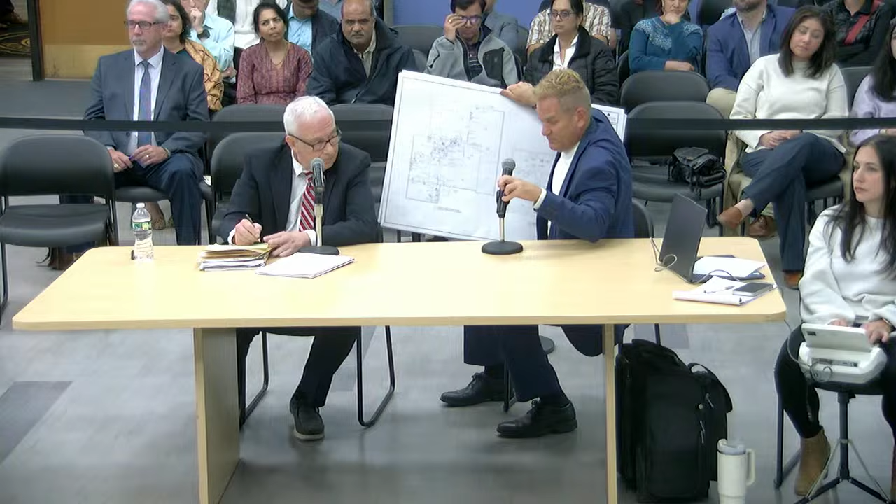Essentially, the current configuration of the house had a void in the back left corner. Mr. Kazmarski, if you'd like to take the microphone and come up to bring it forward so the board can actually see it.

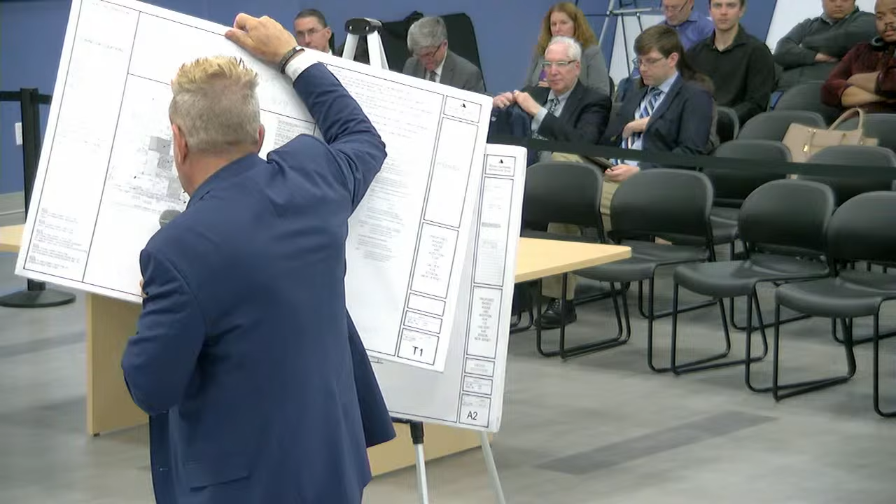So for the basement, what is the total square footage going to be when it's done? So the area that's going from crawl to basement is 22.5 wide, and I don't have the measurement on here, I would say approximately 25. So approximately 22 by 25 area that will go from crawl to basement.

Any other questions for Mr. Kozmarski? Seeing none. Thank you very much, appreciate it, Ms. Shar. Thank you. Call Mr. DuPont. We'll leave this up, I'll leave the site plan for you.

Please raise your right hand. Do you swear or affirm the testimony you'll give this evening is the whole truth? I do. Okay, please state your full name and spell it for the record. John P. DuPont, D-U-P-O-N-T. Mr. DuPont, you appeared before the board prior. If you could please give us a summary of your background qualifications.

Certainly. So I am a licensed professional engineer and planner. Before you today as a professional planner, licensed in the state of New Jersey. I've acted as the Planning and Zoning Board engineer and planner for the borough of Carteret for the past 28 years. I've been throughout the state on applications, including this board, both as a planner and as an engineer. Your licenses are current and in good standing? They are. We'll accept you. Thank you.

Mr. DuPont, you've been retained by the applicant to give the planning testimony regarding this application and variance, correct? That is correct. Did you have an opportunity to check out the property? I certainly have. Could you please give the board the results of your observations? Absolutely. So we're talking about 110 Calvert Street, block 979, lot 5.02 in the RB zone. As you heard, it's an existing single-family, one-story dwelling, approximately 2,300 square feet, a ranch on the property. The applicant is proposing to construct an 800 square foot addition to the rear of the property, basically to square off the home as the architect just showed you.

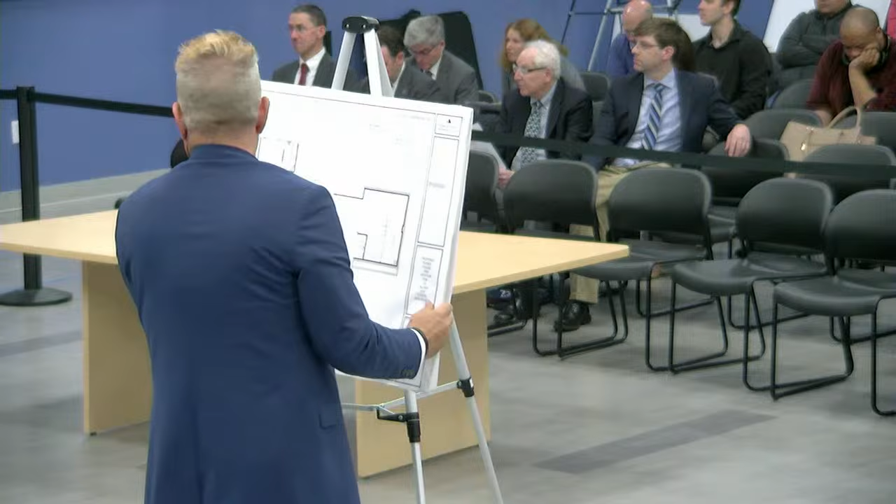Chair, just as the board's considering this, I haven't been involved in the conversation, but there's two things the board may want to consider: Edison's definition of floor area ratio, which is specific to Edison, and Edison's ordinance is pretty tight - it generally excludes unfinished basements and attics from the floor area ratio calculation. But the exclusion doesn't really mention habitable spaces, it doesn't make that classification. Habitable spaces, as defined by the Uniform Construction Code, are areas intended for daily living activities - bedrooms, living rooms, kitchens, and dining rooms. Other things like bathrooms, toilets, closets, halls, storage are not included as habitable for UCC. So, Mr. Architect, you're going to describe to the board the difference between UCC and what the ordinance intentions were versus the language of the ordinance.

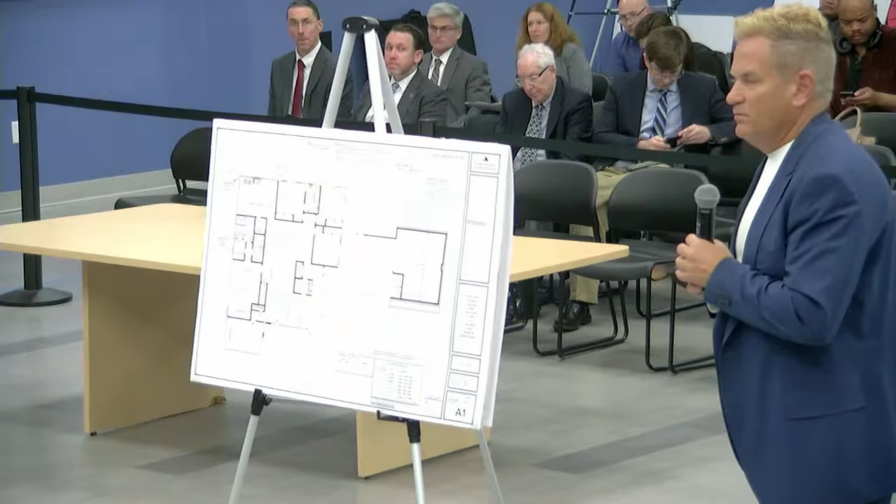Mr. Scheer is going to determine on the fly whether he needs relief from the floor area ratio ordinance, because right now I'm hearing that you don't need relief from the floor area ratio ordinance. Yeah, we do not need relief from that. Okay, so just to make the distinction, you did prepare the floor area ratio calculation certification sheet and submitted it to the board, right? Yes. And everyone found everything to be in order? Yeah, we're significantly under the allowable floor area ratio. And that's because there's no second floor.

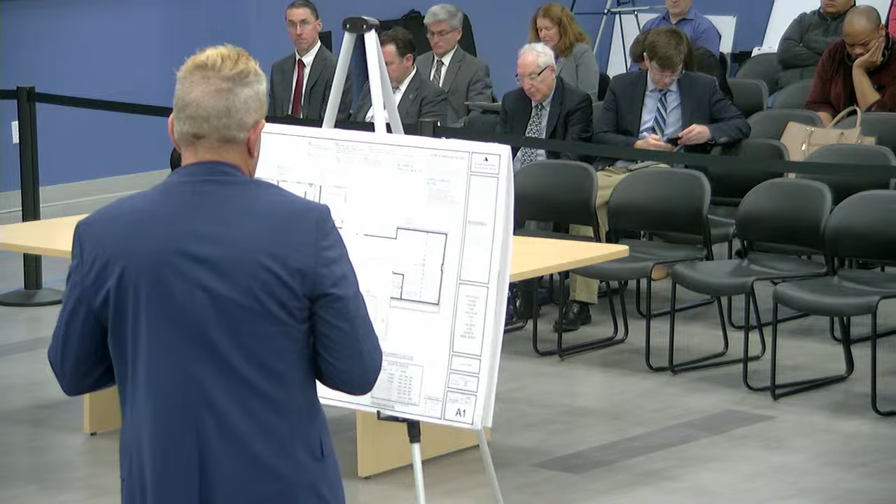Are you counting, whatever the application is now, the basement square feet in the floor area ratio or not? I would have to look at the worksheet. It's not included there. No. Uninhabitable attics and basements are not included in that. Correct, up to 2/3 of that. No, just don't go there - just habitable attics.

Sure, so we have 2,800 square feet. Let's see, we are... right, so where 44% is allowable, we're at 27%.

No, I get it, but does that 27% include the basement square feet or not? So I guess in Edison, garages count? Garages count, habitable attics count, but not uninhabitable attics and not basements. And what about basements with finished rooms?

Right, so I didn't include that in the calculation. You're making it a habitable basement. Even if it's a finished basement, it wouldn't count. Correct.

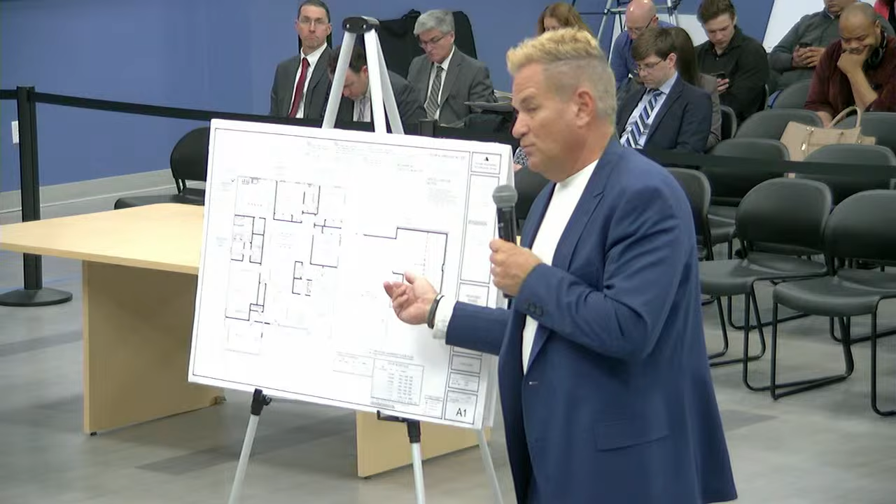The bathroom's been modified to improve its area - it's actually slightly bigger than the existing square footage. This is the area here that has been added as additional basement space. This also would not be included in the floor area ratio, and there would be no bedrooms in the lower level, so it would not trigger anything.

Basements are not included, Ron. Yeah, it's just not, so - finished or unfinished? That 27% is accurate on the plan. Habitable attics are included, uninhabitable are not. Thanks, Jim.

Right, so how much work has been done now for the basement? Did you do the foundation, or just the excavation? Excavation only? The full basement is excavated now, but no foundation? I don't know if it's totally excavated.

He stopped. I don't believe excavation is completed - it's not completed. I did ask, and I spoke to John Soltis. The contractor did take my plans, submit them, obviously anticipating a permit, and started the work.

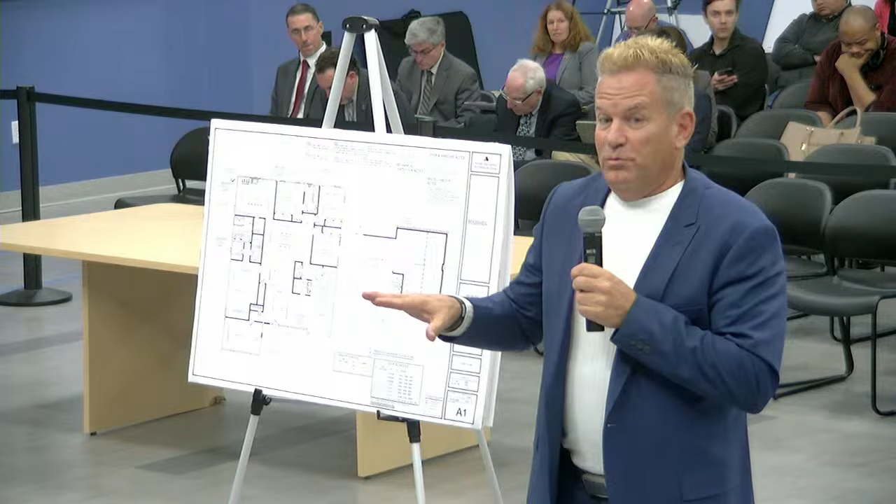So I guess it's worse to start the work with no permit and no submission, but he submitted it and started the work before the release.

But there's a letter of denial on those plans - is that correct? Is that the same plans we're talking about? So he got denied, but then he still submitted it? Well, no - he submitted, started work, then got denied.

So he got denied? No, sir. The timeline's messed up - he received a clear denial to start or do the work. And he started after that? Correct, yeah, he started after that. Oh, I didn't know that.

We've had no contact with the contractor, no contact with the homeowner, none. No one came to our office to explain. I put my phone number down - contact us please, so we can rectify the situation. Never received anything. But I take Mr. Shire's word that they pleaded not guilty to the court, but I received nothing. So that's what it is.

Right, we have two things happening in tandem - I know, a violation for that, and then the request. I got you.

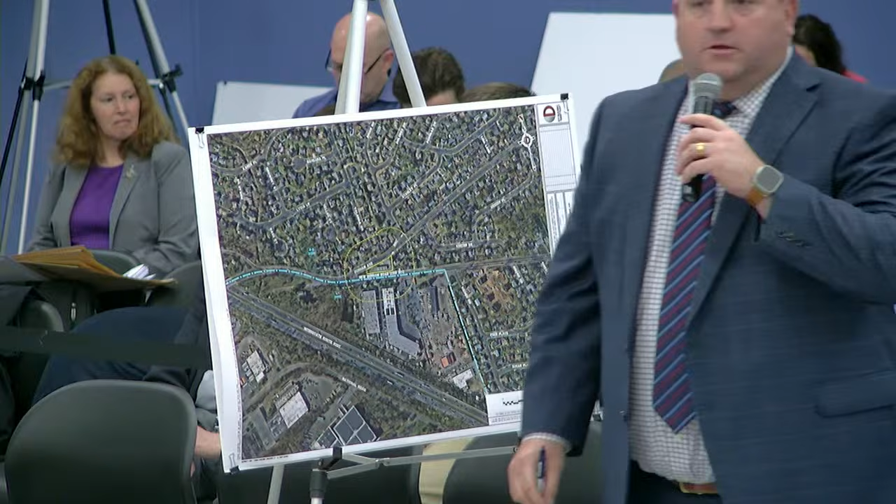We'll get there. Just the aerial. Yeah, so we'll start off with marking the aerial map exhibit, dated April 28, 2026. Has that been previously submitted? No, this is new. Okay, so mark it A1 then. A1. Thank you. And this is prepared by Dynamic Engineering. I'm sorry, what's the date on that? April 28th, 2026. Okay, so today. Yes. Okay, and you prepared that document? Yes. Okay.

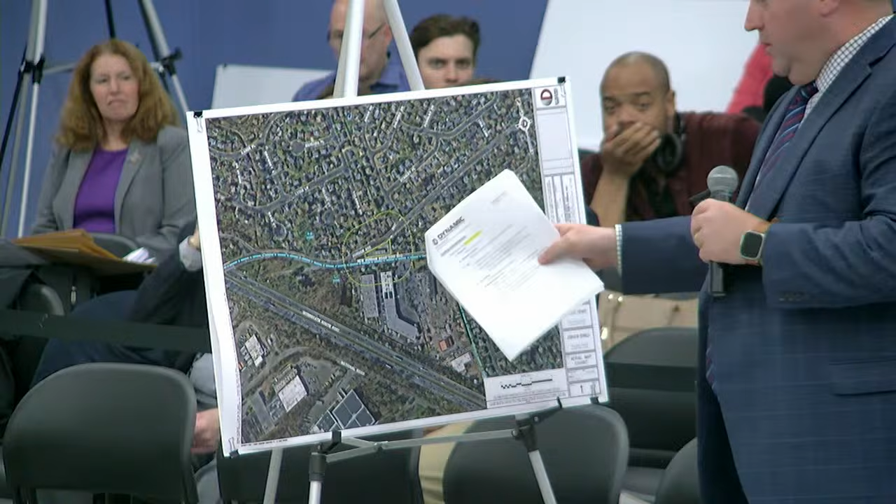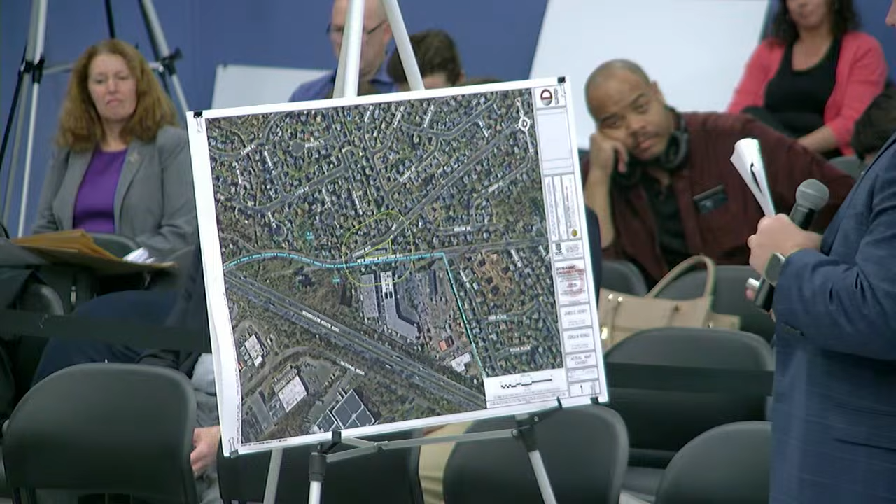So this document indicates an aerial image of the proposed property with the PIQ indicated in yellow in the center, and then a 200 foot dashed line around the property. There's also a blue line which indicates the separation between the LI zone and the RB zone, with the LI zone being south of New Durham Road and north of New Durham Road being the RB zone.

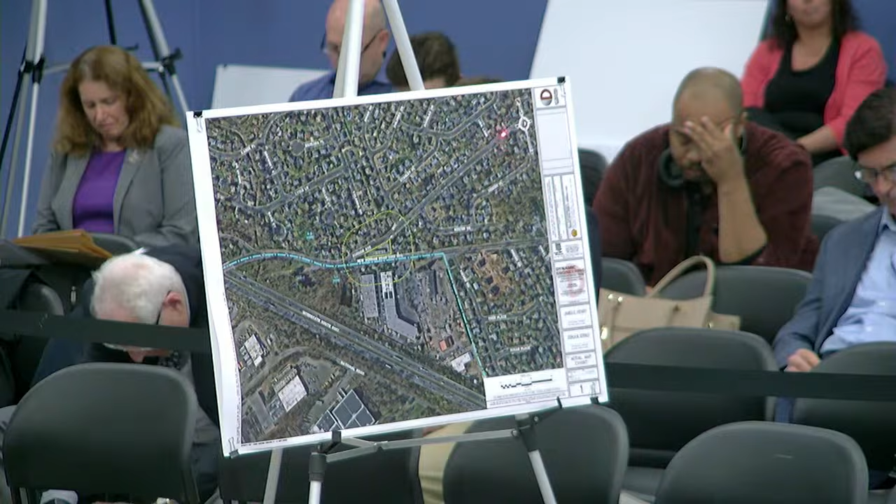The property is known as Block 5702, Lot 12, and the general location is 764 New Durham Road, which is County Route 501, and that traverses east-west. New Durham Road comes in at almost a 45-degree angle, headed northeast to southwest. The lot itself is kind of a pie shape, a very uniquely shaped lot. It's conforming as far as size, but very unique.

It has 2 frontages, 2 side yards, and frontage on Durham and New Durham Road, so it's very uniquely shaped, with its principal frontage being New Durham Road. From existing zoning, it's in the RB zone, as I mentioned earlier, which is a residential district.

Adjacent to the property, to the north are residential uses. To the east are also residential uses. To the south are industrial office uses. And to the west are residential, at the intersection of New Durham and Durham Road.

As far as existing conditions, as was mentioned earlier, we reviewed historical aerial documentation. The gas station was constructed between 1957 and 1963 based on historical aerials, actually before a lot of these residential uses were constructed. The property size is 0.67 acres. It's an existing gas station use with a small building along the easterly property line.

That building has a bathroom and storage area for the gas station. There are 4 pumps. The gas canopy is situated from east to west, where it has 4 pumps. It's been that way for a long time. There's a small trash area adjacent to the building to the north, approximately 10 by 10. It's very small under existing conditions.

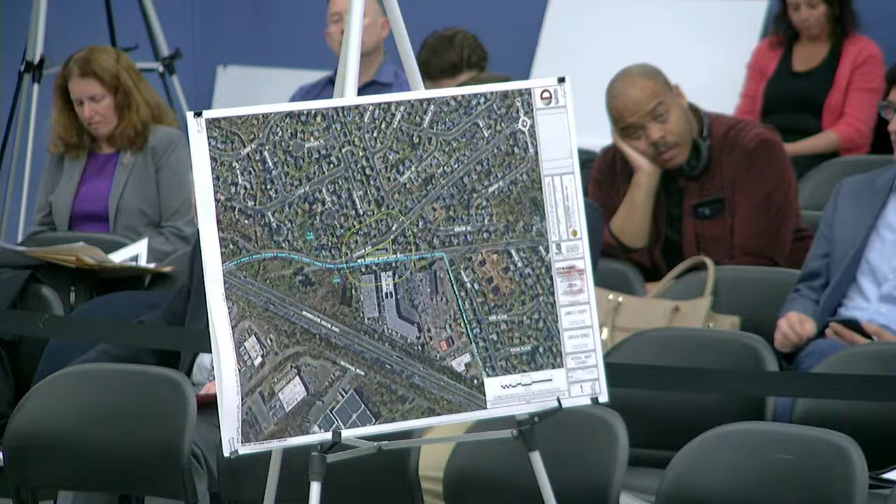That's an existing condition. There's no restrictions on delivery time. Is that tank underground? That's an underground tank. Okay, thank you. So there's underground gas tanks along Durham Avenue, with no restrictions on delivery time or anything like that, as the site was originally approved prior to municipal land use law.

So going into proposed conditions, I'll mark A2. And Jim, also, there's no stormwater management, there's no comprehensive landscaping on the property. It's been around since the 1960s, pretty much.

That's correct. Without change? Without any changes? Is that what your testimony is? There's been some upgrade changes, but not substantial modifications, as Mr. Javelle pointed out. There's definitely been a canopy added since the 60s, and modifications to the gas station. Back in the 60s there was no canopy, just a pump. So there have been changes throughout, but as far as we're aware, I don't believe there were any approvals from municipal land use.

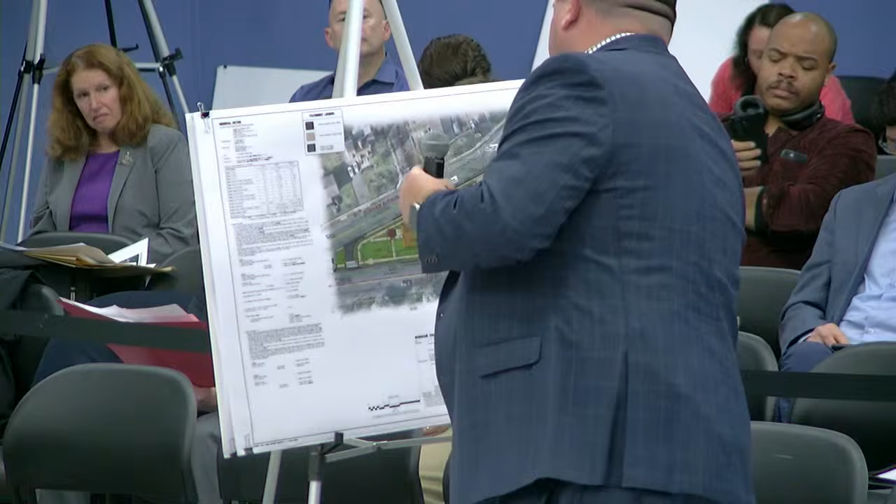All right, so Jim, we're up to A2. A2 is a rendering of the site plan that was submitted with a few minor changes based on professionals' comments. That will be the on-site improvement exhibit rendering, dated April 28, 2026. And who prepared that document? Dynamic Engineering and myself.

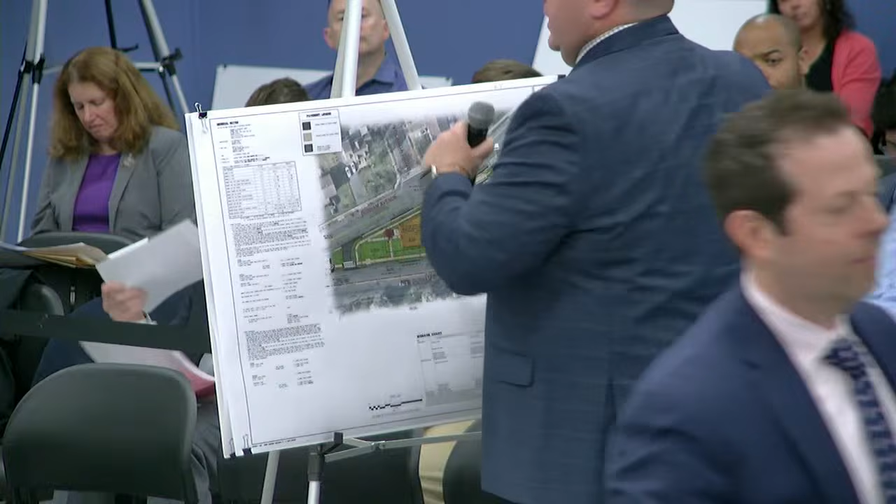Okay, thank you. So this is just a color rendering with the landscaping overlaid over the property and over the site plan. Under existing conditions, as I mentioned, the canopy was situated east to west.

The big thing, based on feedback we received historically, was that there was a previous application submitted that was not approved by this board. We wanted to pull everything away from the residential uses. When we met with the town's professionals, they indicated there was an issue at Durham Road and New Durham Road, and we'll get into the intersection improvements. But we wanted to situate this so all the activity was pulled more towards the tip of the triangle, away from the adjacent residential use to the east.

So what we're looking to do is propose a 2,820 square foot convenience store. As I mentioned, the hours of operation would be 5 a.m. to 10 p.m., so it wouldn't be 24 hours.

There will be one gasoline fueling canopy, square in nature, in the center of the site with a fueling kiosk. There will be two state-of-the-art double wall fiberglass underground tanks installed. The tanks out there today have been there, I believe, since the 1980s, based on the operations person I spoke to. So this would be a major upgrade from a safety standpoint as far as upgrading the existing tanks. From an impervious coverage standpoint, we would be reducing the overall impervious coverage by approximately...

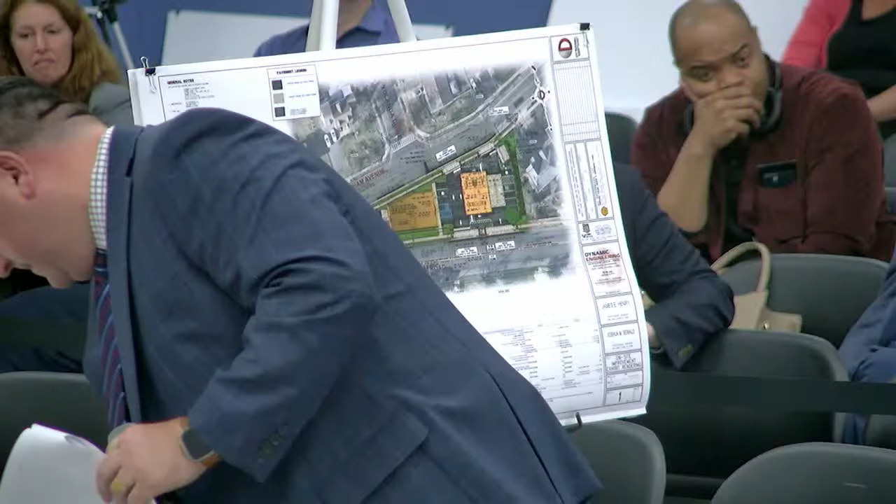As far as public improvements, I'm going to bring up an exhibit showing the existing conditions. We'll mark this A3 - it's the existing intersection conditions exhibit dated April 27th, 2026, prepared by Dynamic Engineering.

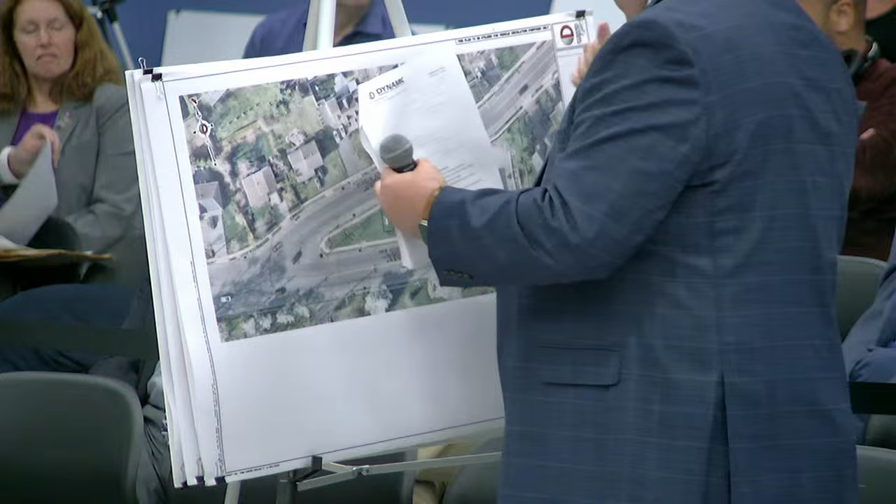This exhibit shows how a car aligns and what concerned the board professionals. As you come down New Durham Road to the intersection, the car is angled at about 45 degrees. One of the board professionals asked what improvements could align the car better with New Durham Road and provide a safer intersection. So our traffic engineer will get into more detail, but we show a number of striping improvements and landscape island improvements based on a meeting we had with the county.

We've had several meetings with the county over the last 6 months going over these intersection improvements. One other major public improvement: we met with the township's sewer department this week regarding the existing sewer that traverses east to west along New Durham Road. One of those pipes is back-pitched, so it's not flowing properly, and they asked us to upgrade the existing sewer main along New Durham Road. We agreed to do that - our client agreed to modify it so it's no longer back-pitched.

So those are the two main improvements we're doing. I'll show you an exhibit of the intersection improvements briefly, but I'll leave the main description of the intersection to our traffic engineer - I want to show it as part of the site plan application so it's clear.

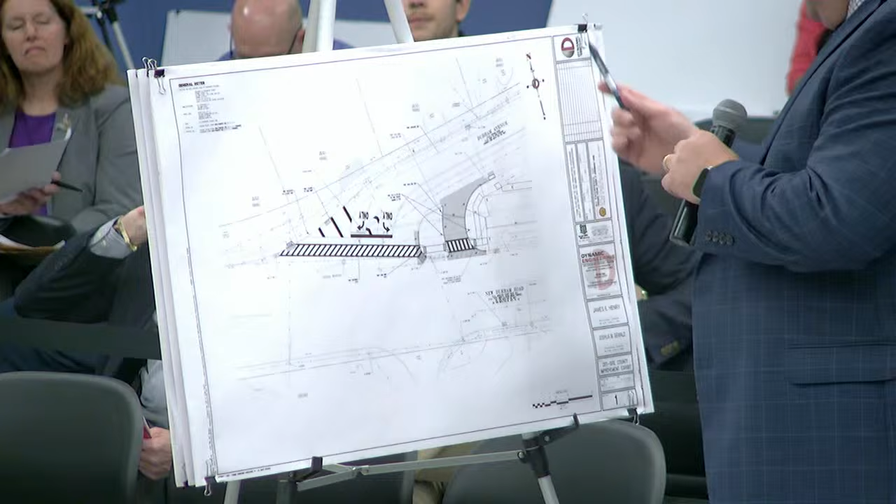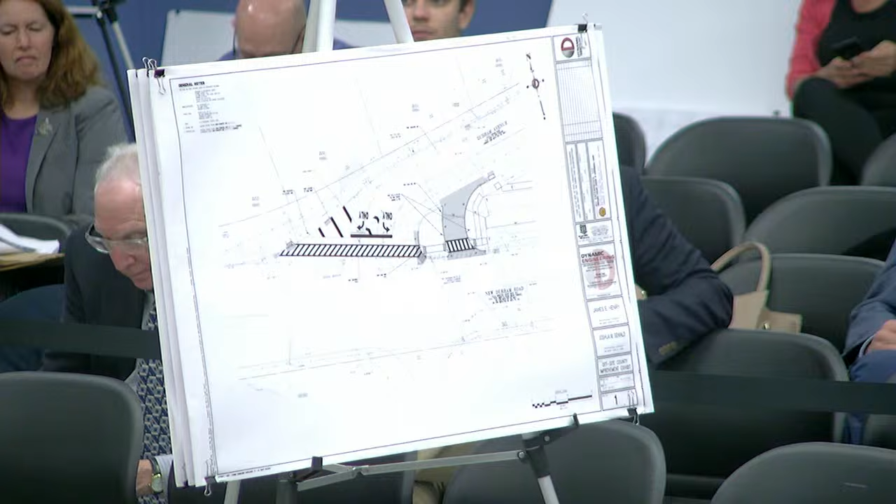This is the off-site county improvement exhibit, labeled A4, dated April 27th, 2026. It covers the modifications we're proposing, including adding a landscape island, a dedicated right-hand turn lane off New Durham Road, and re-angling the way cars hit the intersection so they hit it more at a 90-degree angle. We're also providing a crosswalk, and the island will act as a safe harbor for pedestrians. There's another crosswalk as well as sidewalk improvements along New Durham Road and Durham Avenue. Our traffic engineer will go into more detail on safety, but I wanted Jim to explain the site improvements themselves.

So I'm going back to A2, which is the site improvement exhibit - the colored version of the site plan. Correct.

From an operations perspective, I confirmed verbally with our client's operations person, who also worked at Shell prior to our client purchasing the property, that this gas station operated 24 hours and stopped operating that way approximately around COVID. So we're limiting the proposed hours to 5 a.m. to 10 p.m., as previously mentioned.

As far as number of employees, under existing conditions there's 1 employee at the gas station, and we're anticipating this neighborhood convenience store to have approximately 2 employees inside the building.

From a safety perspective, there was a comment regarding video cameras from the board's professionals, and I confirmed with our client that they're willing to provide access to the police if requested by the Township Police Department from a safety perspective, and add cameras.

As far as trash pickup, we're adding a 10 by 20 trash enclosure approximately where the existing trash enclosure exists today. It's decorative in nature and will be masonry to house the dumpsters under the proposed conditions.

As far as pickup, we will restrict the pickup time with the understanding that we're adjacent to residential to the north, and we want to make sure we're good neighbors. So we're limiting the hours, modifying the pickup time for the trash enclosure, and modifying the drop-off time for the gas, agreeing as best we can to make sure that happens during daytime hours so it doesn't happen overnight under the proposed conditions.

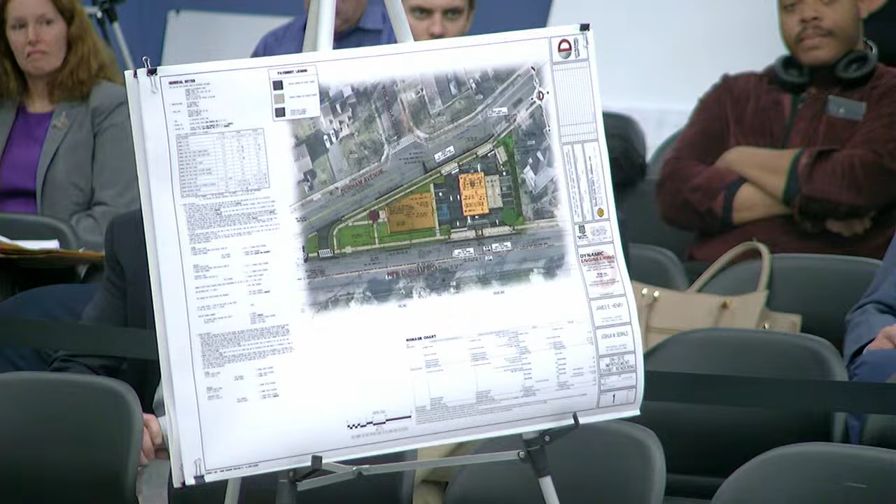There was also a comment from the board's professionals regarding a generator on site. There is no generator proposed on site. What our client generally does is contract with a generator company, so they come and drop off a generator within 24 hours if one is needed. It's not going to turn on once a week and create a noise issue - there will be a quick hookup inside the convenience store and the gas area, so if there's an emergency like Sandy, there's an easy way to get the gas station up and running.

And where would the generator, if it has to be deployed, be placed on the property? Likely just on the sidewalk area adjacent to the building.

All right, Jim, you want to talk about the lighting? Well, hold on a second, I think the vice chair wants to. Could you be more specific as to where the generator is going to be located?

So this is a portable generator. No, I understand where it is, but where would it physically be? It would either be in the front of the building or behind the building on the sidewalk areas. In front of the 5 parking spaces, or behind the building.

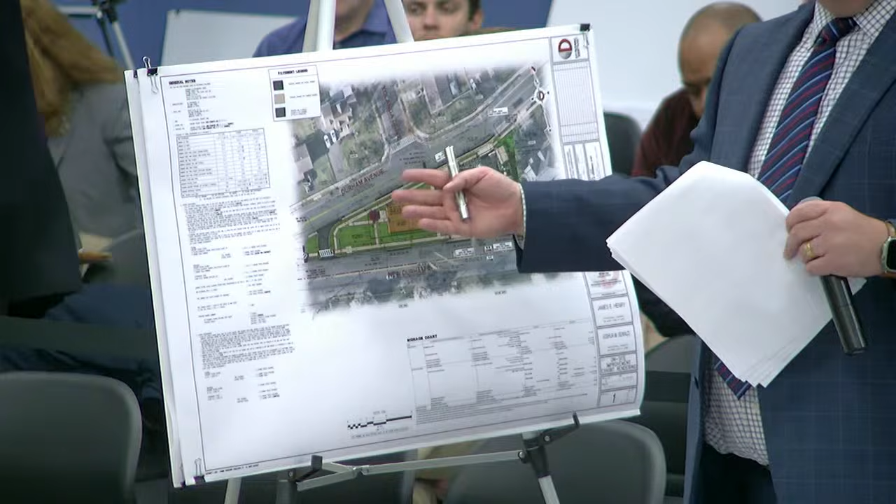If we want to restrict it behind the building, we can make sure we put the electrical room back there, close to the Durham Avenue side. We haven't fully designed the inside, we just have a conceptual layout. So what we can do is, if we want to have it behind the building, we can show it there and have a designated generator area. We don't have an issue with that.

I was just saying there's a 6-foot wide sidewalk. If we want to put it in front of the building, that's an option too, but this would only be during emergency circumstances. You're still in operation though, and you can't put a generator on the sidewalk. So the point is we can put it in the back of the building, Mr. O'Gorman, screened so it doesn't affect the sidewalk.

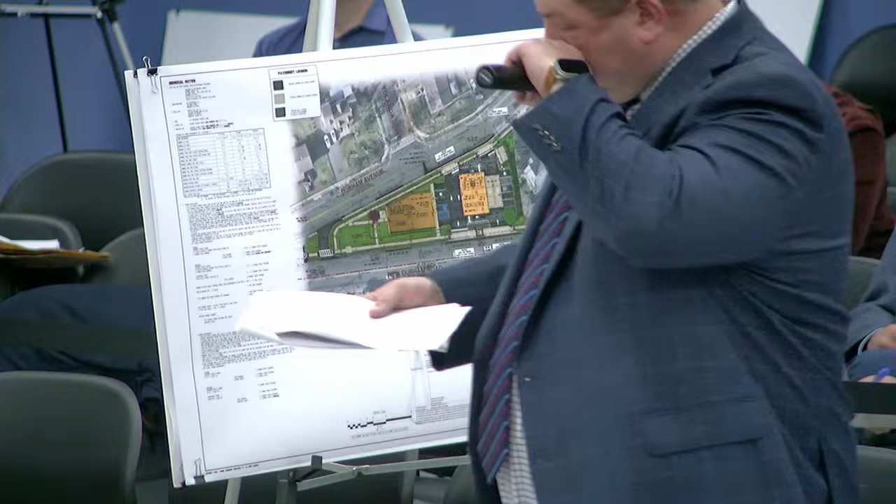Mr. Carley? Just bring your microphone closer. As the Board has seen with Wawas, QuickCheks, and other things you often see in central New Jersey, the generator will probably be towed on a little trailer into a parking spot and plugged into an outlet purpose-made for it, likely a 15-amp outlet. So it'll occupy a parking spot for that period during an emergency.

Mr. Henry will testify that it's not the station owner's intent to run off an emergency generator 24/7, 300 and some odd days a year. Is that about right? I'm agreeable to that, yes. Okay, thank you, Mr. Carley.

All right, Jim, you want to go to lighting? Sure. The existing lights underneath the canopy pop out of the canopy, they're not fully flush underneath it. It's an older way the lights were situated a number of years ago. We're looking to have fully flush LED lights underneath the canopy. We're proposing 12 recessed canopy lights underneath with a mounting height of 16.5.

As we get closer, there's one light adjacent to the residential to the north. That light is very short, so there's no spillover onto the residential. We provided a lighting illumination study to the board's professionals, showing 0-foot candle at the property line. There are also building lights around the outside, which are downward facing full cutoff lights. I believe there was a comment regarding the color of the lighting, and we'll agree with the board's professionals' recommendation to make sure it's not a white color.

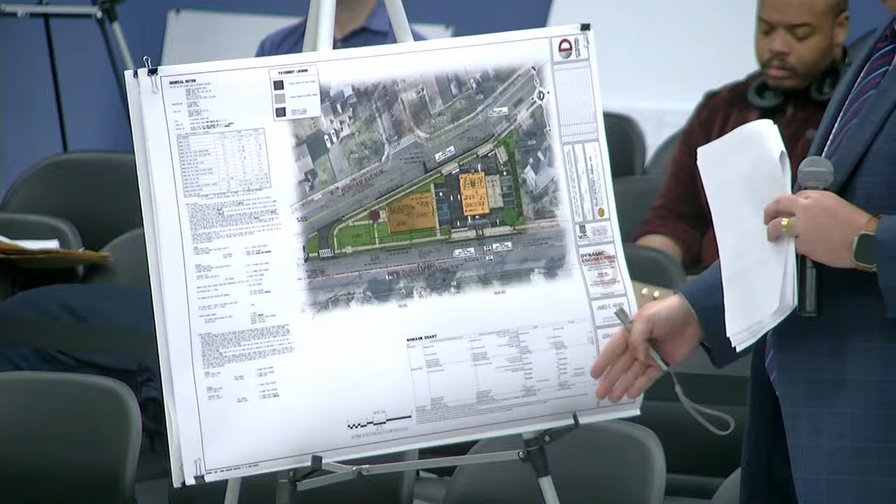I would imagine so. One thing, we're going to get into landscaping in a minute, but we're proposing a thick landscape buffer. When installed, it'll be a mature kind of landscaping with evergreen trees. We're also proposing a 10-foot vinyl fence to help buffer the adjacent use from the residential, so it's going to be a very thick buffer to the east.

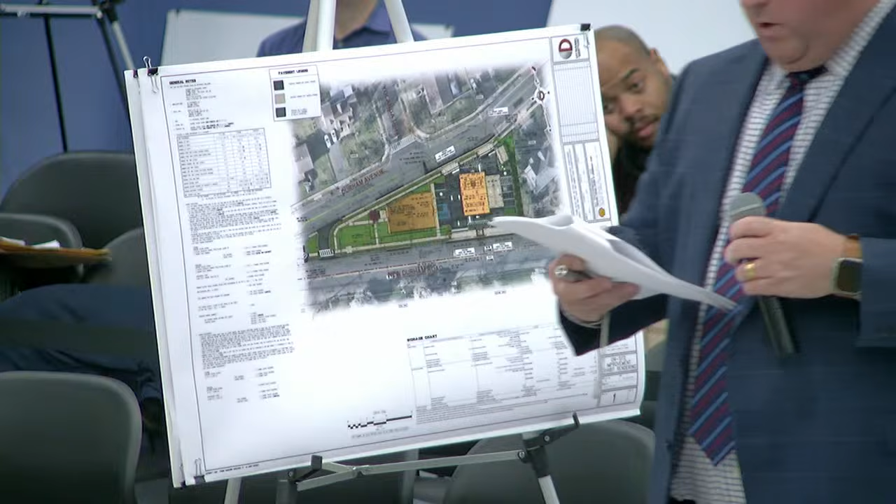From a landscaping perspective, we're proposing 1 shade tree, an ornamental tree, and 20 evergreen trees, installed at mature heights of 8 feet. There was a comment about installing green giants, but the board professionals had concerns over deer, so they recommended switching to eastern red cedar, and we're agreeable to that. Overall we're proposing 20 evergreen trees, supplementing the existing evergreen trees along the easterly property line.

We're also adding 42 shrubs, 25 deciduous shrubs, and 17 ornamental grasses. The main idea is to provide nice landscaping, emphasizing buffering the use to the east, and also providing buffering around the perimeter so no headlights face residential uses to the north, as well as nice landscaping along the edge of the building.

That results in a reduction, not only in landscaping but in the whole site orientation, of impervious surface, correct? Yes. So in total, we're proposing 106 total plantings out there as a major upgrade to the overall site.

There was a comment regarding the cut and fill as far as soil removal. We are showing 52 additional yards of fill coming onto the site, so we're not showing any cut. That was one of the professionals' comments regarding whether we would need a soil permit. So we're around 52 cubic yards of fill on site.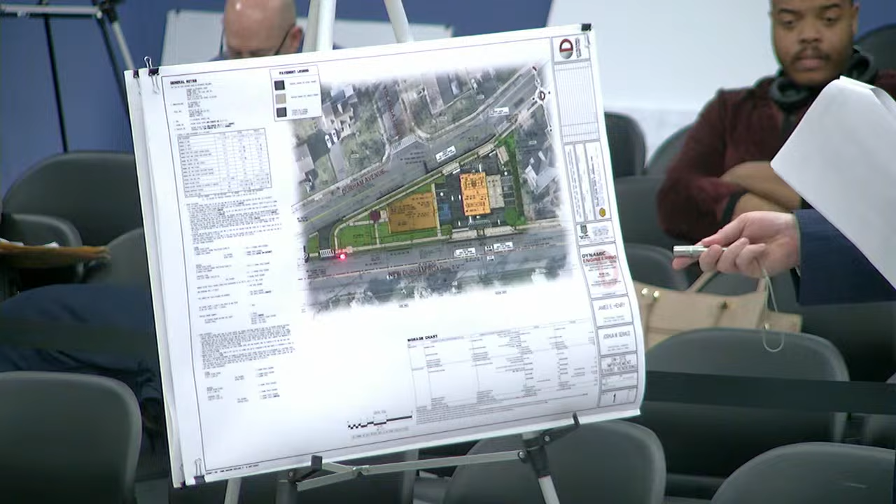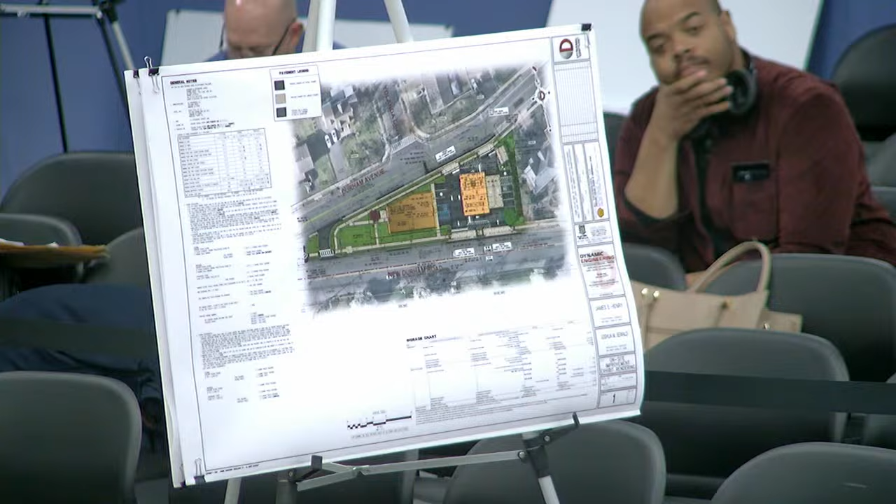Any area that we thought needed to be upgraded, we modified the sidewalks, and we're agreeable to upgrading the sidewalks if they're in bad condition along basically every frontage that surrounds the site. We're also providing crosswalks across Durham Avenue, so it's a major upgrade. We're also adding ADA ramps at every single intersection, including across our driveways along New Durham Road as well as Durham Avenue.

All right, why don't we now go into the building? Great, thank you.

While we just changed the boards, Jason, can you confirm that along the easterly property line a solid fence will be installed? Yeah, Jim had indicated that there would be a vinyl solid fence along the easterly property line in addition to the landscape buffering that's proposed. We were showing it at 10 feet to make sure it's a significant buffer to the adjacent residential.

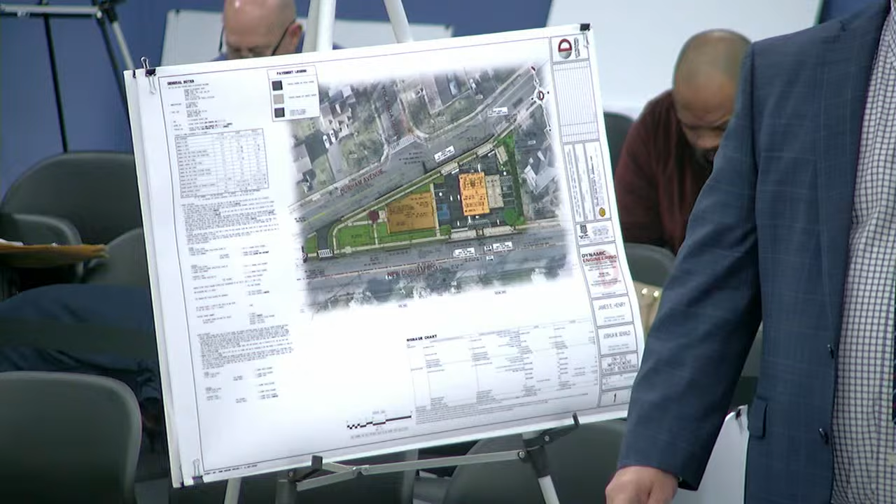Got it, thank you. 10 feet in height, Jim? Yes. Which is, your typical fence, just so everyone's aware, is approximately 6 feet. So if the board is open to it, we'd be willing to install a 10-foot high fence or an 8-foot, whatever the board feels is appropriate. Our client's willing to do whatever it takes to make sure there's a proper buffer there.

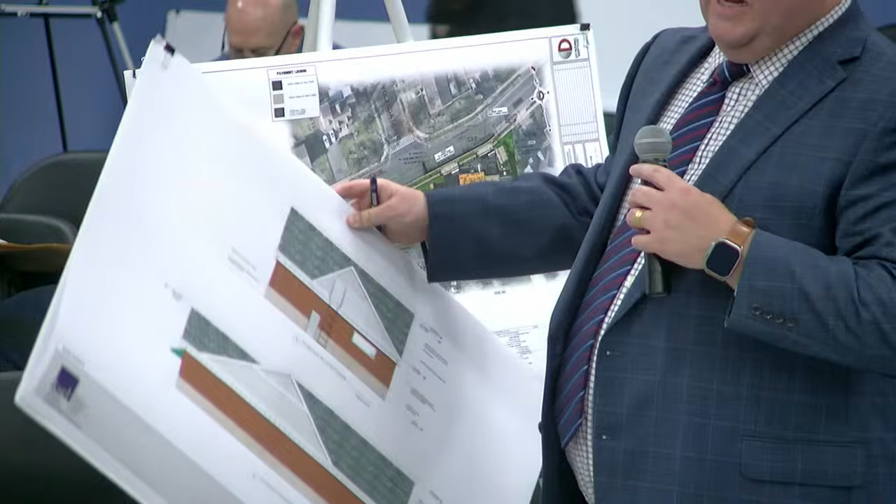So this is what we're going to be showing now are just elevations of the proposed building, as well as a floor plan showing the interior layout of the building. Our architect is here, but I will just be presenting it in case you have any specific architectural comments.

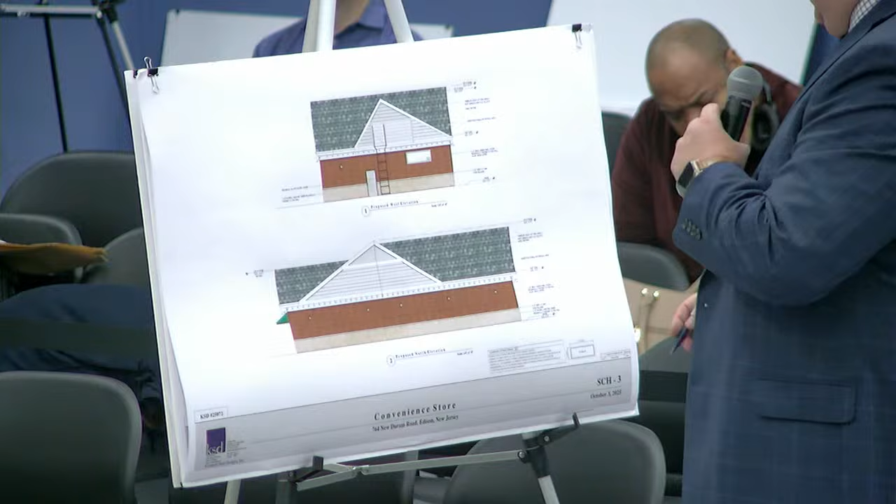So A5, this is the convenience store. A5 is a color rendering of the elevations that were submitted to the board, prepared by KSD Architecture, dated October 3rd, 2025. How many pages is it? There's 2 pages. One is the elevations and the other is the floor plan.

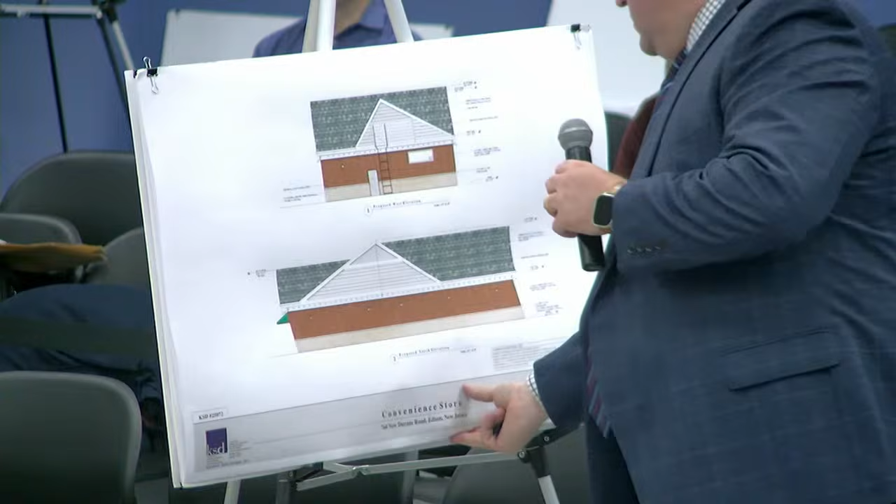Actually 3 pages, I apologize. So we have multiple elevations. Shift over, go to sheet 2, so you can see the front of the building.

As was mentioned earlier, the building that's out there is in disrepair. One of the big things we worked with our architects to do is really make this fit in well with the community, make it look residential in nature, have a pitched roof, and give it that residential feel and a high quality feel, being that it is a residential convenience store. From a building size perspective, it's relatively small. Wawa, for instance, is roughly about 5,000 square feet. This is a smaller one, under 3,000 square feet at 2,820 square feet.

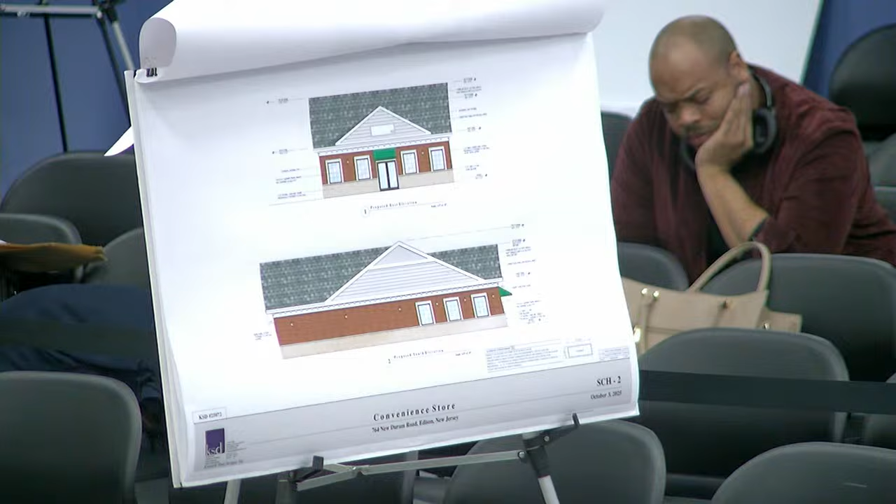There's a main door location in the front, as well as a door to the rear. The main door goes to the parking lot side, not towards the north of the property, correct? That's correct. So it faces east.

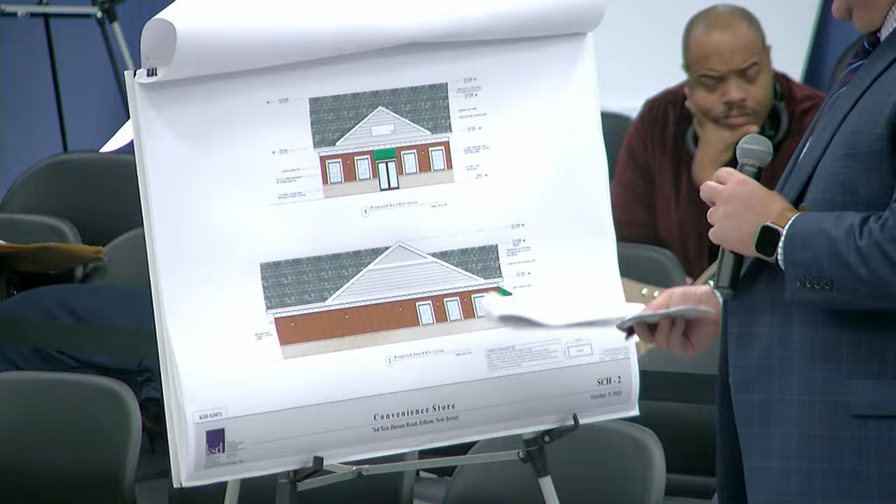From a building design perspective, we're adding a brick veneer system, probably a Nichiha panel, to give it a brick exterior look, with a natural limestone veneer on the bottom, which is a high quality stone material. Aluminum frame windows really emphasize the architectural and residential neighborhood transition from New Durham to Durham. The building height is 24 feet to the roof eave, with basically a pitched roof, making it look very residential-like.

The HVAC is going to be enclosed in the roof. A lot of times when you see commercial uses, there's HVAC adjacent to the building, and it doesn't look very nice. This actually would be screened within the roof, so it would not be visible from the naked eye if you were standing adjacent to it. It's an A-frame roof with asphalt shingles and dentil molding wrapping it to give it a colonial look.

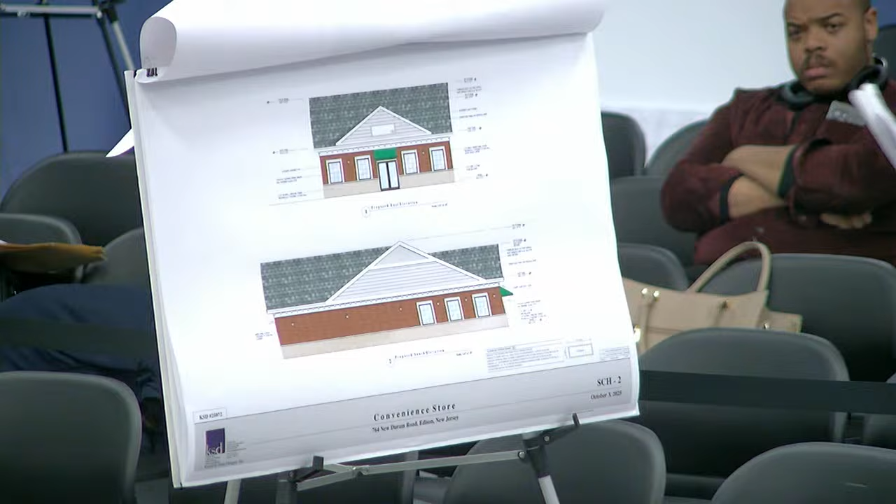Overall, the building itself, between the two sheets, you can see at the rear is where the HVAC would be, facing to the west. Again, this would not be visible - the HVAC would be fully screened with a louver system facing west. With the understanding that we don't really have a back of building, you can see the building from all four sides. So our client was agreeable to making sure all four sides of the building look really nice.

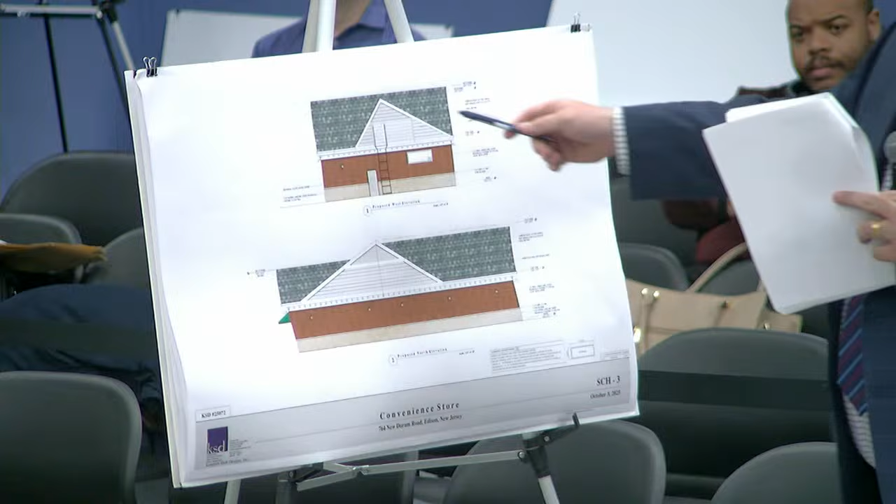And all four sides have a nice finish. So you can see the pitched roof in the front would have a small canopy overhanging the sidewalk, and then the rear would just have a ladder system which would go up to the HVAC area.

So going into the third sheet, which is the floor layout - that's SCH-1, October 3rd, 2025, prepared by KSD.

As you come in, the parking area is to the right-hand side. This is situated so that north is facing up on the third sheet, so as you enter in, you come in off the easterly side. You come in, and there are racks for convenience store items directly in front of you. There's a sales POS item, hot dog roller, as well as POS area.

There's a coffee area along the northerly side of the building, and then there's a refrigerator area and back area behind it, which would allow for access out the back door. The refrigerator area, as you came in, would be against the far wall, providing for refreshments and drinks, and then just a standard coffee island, as well as racking for standard convenience store items.

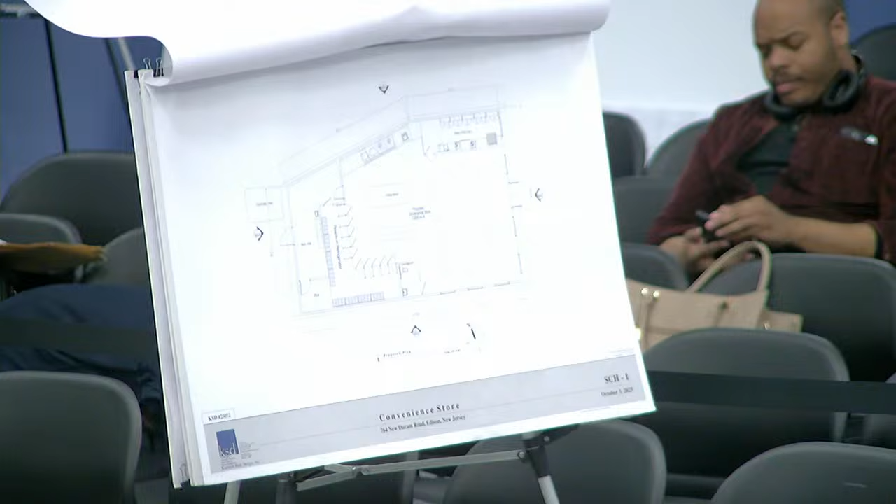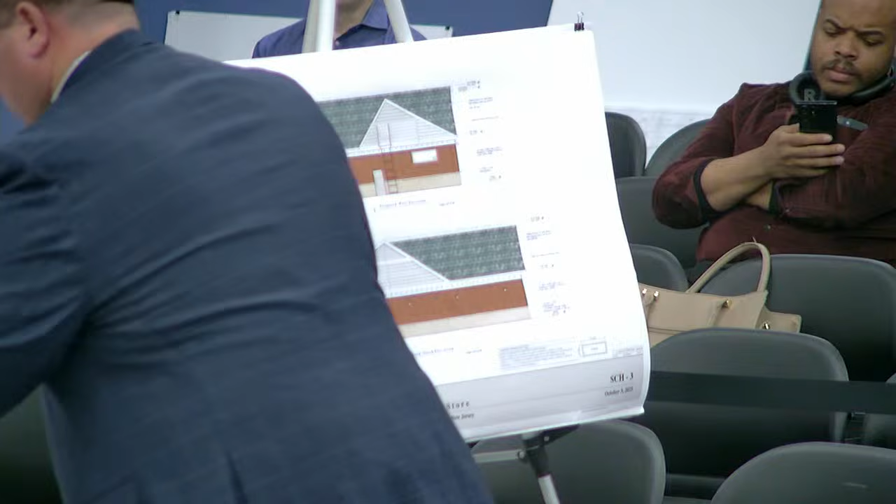Mr. Carley? As Mr. Henry's testimony was thorough, just a quick question for Mr. Tuvell and Mr. Henry. Sure. And this isn't in my report - it came into my head when Mr. Tuvell was saying the station had been there since the 1950s and 1960s.

And then when I was going on about Wawas and QuickCheks - now you often see, in addition to propane, which you've addressed, air pumps, vacuum stations, ice machines. You used to see milk machines, and plug-in locations for multiple cars. Those type of site features you see around gas stations - do you anticipate any of those on your site? You want to vacuum your car, some gas stations give courtesy vacuums. If you want to blow up your tires, there's courtesy air pumps. Do you see that around this station?

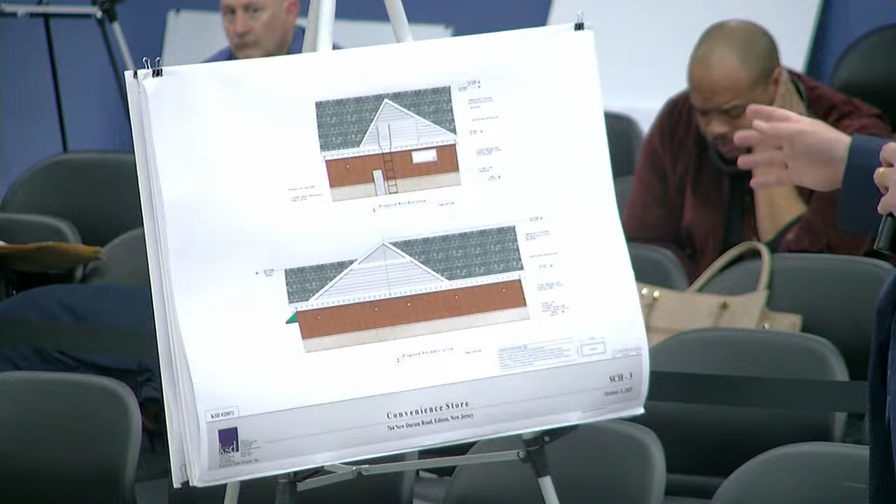Yes, I think on the site plan there's vacuum and air, which we're providing mainly because most people expect that at a gas station. So we are proposing that along the easterly property line, shifting it away from directly in front of the building. And as far as exterior ice, we're anticipating that to be inside the building. Our client doesn't like to have that clutter look in front - he operates a number of gas stations throughout New Jersey and he likes to have it nice and clean inside the building.

Yeah, and Jim, Mr. Ayotz and I will remember when they sold milk at gas stations outside. Remember the milk machines? Yes.

Now, for all of that, with the parking related to those features, we're going to rely on Mr. Verderesi because I'm assuming he's going to talk about the parking. You had provided 5 spots plus 6 banked - the bank's going to be there now. You're going to have handicapped and then some dedicated parking in those 11 spaces. So we'll rely on Mr. Verderesi's testimony to describe that to the board. Is that acceptable? Yes. Absolutely.

As Mr. Henry said, he did cover most of the action items where I requested testimony. The preponderance of the items in my March 26th report do point to plan revisions that frankly would not result in the site plan being altered dramatically. The sizzle on the steak relative to site layout here is with the County of Middlesex, with the rearrangement of that intersection. And I'm sure Mr. Verderesi will explain the efforts that his office is going through in that regard.

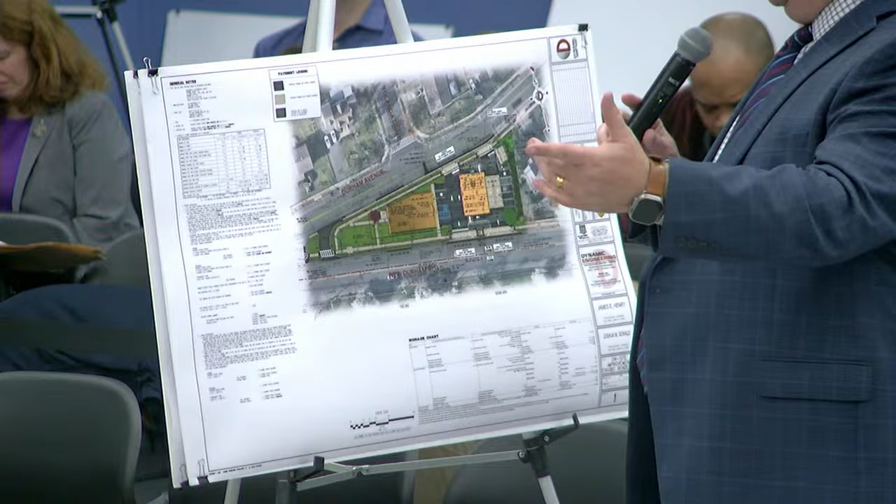And just one thing to clarify, because we are adding the EV space, we did have 11 spaces, but we get the credit for the additional space because we're moving the EV. So we technically have 10 spaces, but it's 11 when you consider the EV space.

Yeah, I got you. Thanks so much. Thank you, Mr. Chair. Good, Mr. Crowley? Yes, thank you very much. Okay, Ms. Knight? No questions. You good? All right, thank you very much. Okay. Do you have any further on direct? Nope. Okay. Does the board have any questions?

Mr. Chair, Ms. Chhabra? I have a few questions for Mr. Henry. So to start off with, the gas pumps are being relocated in the canopy. They're being relocated closer to the residentials, and the store is being proposed closer to the intersection. Why is that? What's the beneficial use there?

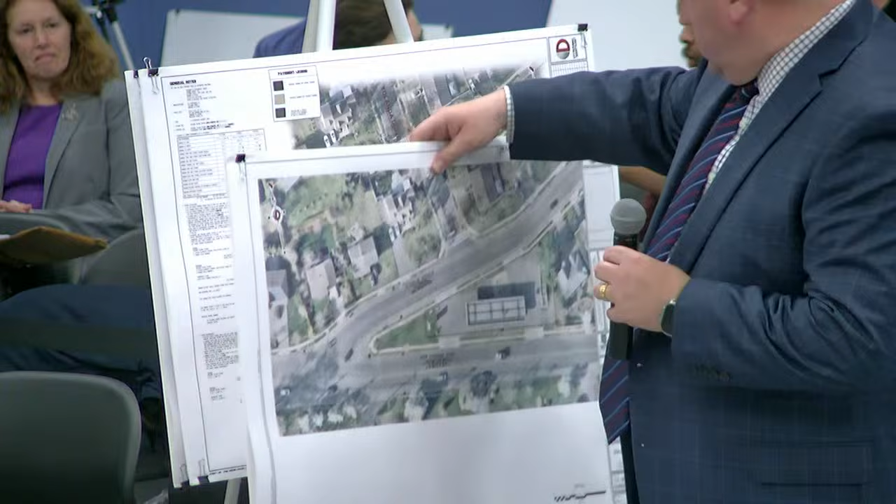I'm trying to understand, you're saying the gas station's being moved closer? Correct. Right now, there's a masonry building that's closer to the residential. Essentially, that is what's being expanded from 300 square feet something to 2,800 square feet, but it's being flipped closer to that intersection, and that canopy is coming closer to the houses. I could scale it off.

My understanding, I think, the buffer is being made larger under proposed conditions, so the gas station isn't getting closer to the residential. It's not getting closer? No, it's being pulled away from the residential.

But right now, there's a masonry building there, but that building is going to take place, and instead of that, we're going to have parking there. Right now, there's a 5-foot setback to the residential on where the parking area is, and we're creating 10.5 feet. So we're pulling it back an additional 5 feet and creating more of a buffer to the adjacent residential. Okay, but the current existing masonry building is going away, and parking is going to be there, correct?

Yes. Okay, so what's the beneficial use of that, having parking along that side? My question is because now you have headlights going into people's houses, et cetera. Well, the headlights aren't going into people's houses. We've got a thick tree buffer that's right adjacent to it, and then we're also proposing a 10-foot high fence that's going to block any sort of lights or anything like that.

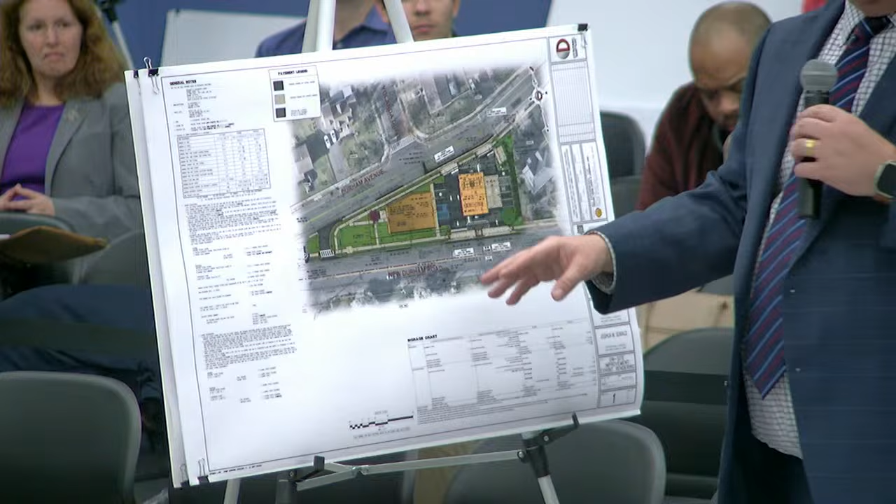The parking spaces that are going to be used primarily are the spaces that are in front of the building and the de facto spaces that are underneath the canopy. So Jim, these spaces over to the east are going to be seldomly used under any circumstances, especially during off-peak hours. Yeah, Jim, I think it's a good question, and I think we should walk through it slowly.

Sure. I'm glad it was asked because we paid a lot of attention to this issue. So right now, the structure that's there is very small, correct? Yes. Okay, that's one. Two is the landscaping that's located in that area right now is decent, but it's not very robust. Is that fair to say? There is no landscaping there, unless you're talking about the northeasterly corner where there's an existing vegetated area. But behind the building, I was out there today, there is no vegetated area between the back of the building and the adjacent fence line, which is, I believe, the residential.

Okay, and there's no opaque fence that we're proposing, correct? No, the residential already has an opaque fence that's adjacent to the property line, and we're adding another one adjacent to it, even higher. All right, so now let's talk about the proposed. Let's start from the east and go west, right? Sure. First, we're going to have an opaque fence that runs the length of the property and also is 10 feet high or 8 feet high, whatever the board feels is appropriate. Correct. Okay, then we're adding...

One thing to note, we're not running along our property line because our property line actually bisects the residential property. We thought it would be odd to have the fence go through there, even though when you look at the site, it's odd because our property line kind of bisects their front yard. So our client is looking to cut it where the building is so that the fence doesn't awkwardly go through the middle of their property.

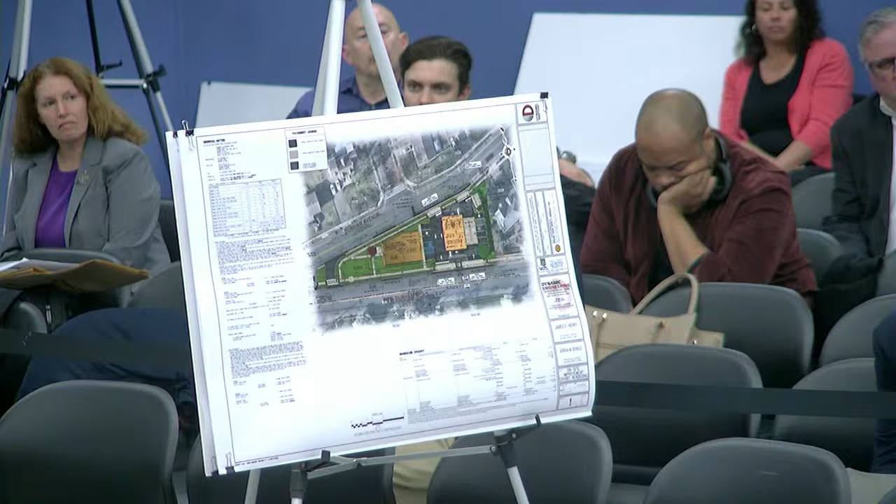I'll highlight where the setbacks are, just so everyone's aware. The setbacks are that area right there. Because of the unique shape of the property, you couldn't add a convenience store along the easterly side of the building and have anything close to sizable space that a minimum size convenience store would need, based on the setbacks. So you would be looking for setback relief on the residential side, but not on Durham Avenue.

It's very hard, and Jim could speak to this, but because of the triangular shape of the property, it's very hard to comply with the setbacks, and also the fact that we have multiple frontages. I get it, but at the same time, on the residential neighborhood on the easterly side, now you are putting a 10-foot fence, shrubbery, tall plants, and also the building would be a buffer against the neighborhood.

I don't necessarily think that we're opposed to that. I think it was more the fact that in the past there was objection to that from both the board and the public. So when we re-examined the issue with the client and the project team, we asked, okay, there was objection to that, how do we resolve it? So we moved the canopy further away from the residential property line to the east.

We made sure that the front of the building opened to the parking lot, and the activity couldn't be seen from the residential road, and we enhanced the buffer on the easterly side. So that was our thought process, based on past experience with the board and the public.

It would do a number of things. Access and egress would also move away from the residential area. I'd let the traffic engineer address that. And then, currently you have the 30,000-gallon gasoline tanks closer to the residential neighborhood, and that would move away from the residence as well by moving the pumps away from there.

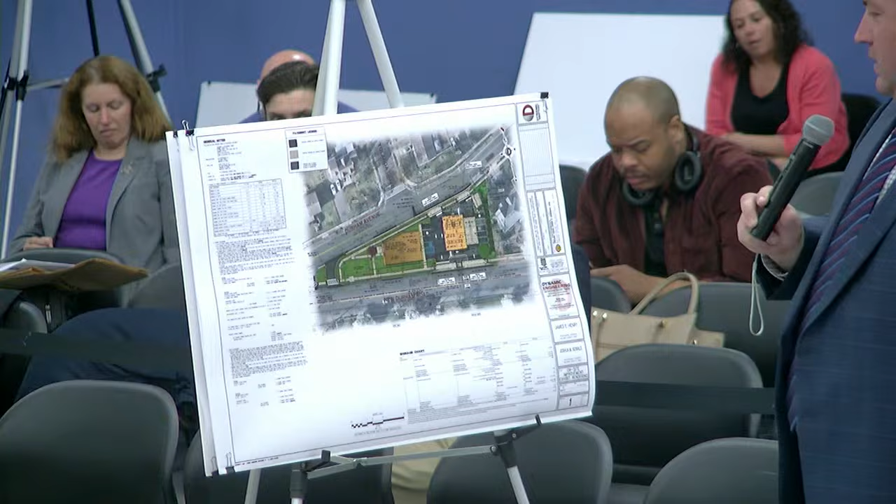So our traffic engineer will get into this. We have a very similar layout - we designed the gas stations on the Parkway in Woodbridge, very similar layout and spacing to what we have here today. This is obviously a lot less traffic. This is a neighborhood convenience store and gas station. It doesn't nearly have the traffic that you're referencing, like you'll have that many cars.

I was even out there today at the gas station, there were no cars on site at all. Every weekend I pass through it. I used to have Jersey - there was a gas station called Jersey gas station before. I used to have a gas station, so I used to use that gas station.

Be honest with you, if there are 2 cars there, it was difficult to move around. Now you're adding a convenience store, 4 gas stations - I expect almost 4 to 5 cars almost all the time on that property, Jim, including 3 employees' cars.

I think Jim and the traffic engineer should respond to your question, but I just want to ask Jim one thing - do the drive aisle widths comply with the standards in the ordinance? Yes. So for the two-way traffic entering and exiting the site, it's 24 feet, correct? It's a little bit over 24 feet, approximately 26 feet.

Okay, so how many gas stations have you designed in your career? Over 100 gas stations. Okay, so in your professional opinion - and it's a fair question, I want to make sure we make the board comfortable with it - the drive aisle widths and the turning maneuvers, and we could have the traffic engineer speak to it as well, but from a site perspective, you believe they meet all industry standards and work well on this site? Yes. Okay.

So during your snow removal, where do you stack the snow? Which part of the property do you stack it? There's plenty of areas in the landscaping adjacent to it. You could stockpile it using a skid steer. There's areas to store it on the west side of the building where there's landscaping. So there's areas to store it.

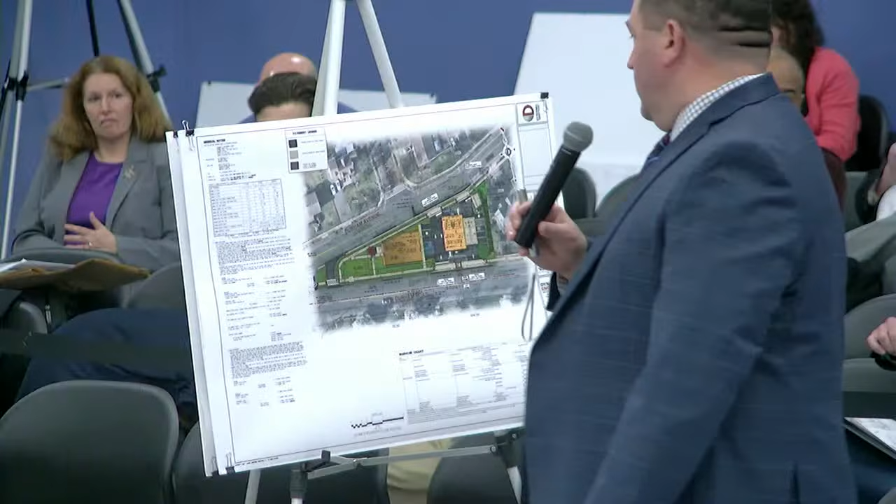And vendor delivery would be at the entrance side or on the back side? The delivery would be in the front. We'd be using the front? Yeah, not on the residential side was your question, right? Yes. Yes, okay.

Thank you, thanks John. Any other questions from the board? Yeah, Mr. Chairman, Vice Chairman.

Can you show on the drawing where you would pile the snow? So there's a grass area behind. Folks, please, we're going to ask the applicant to give you respect when we go to the public portion - please give them the same respect. Thank you.

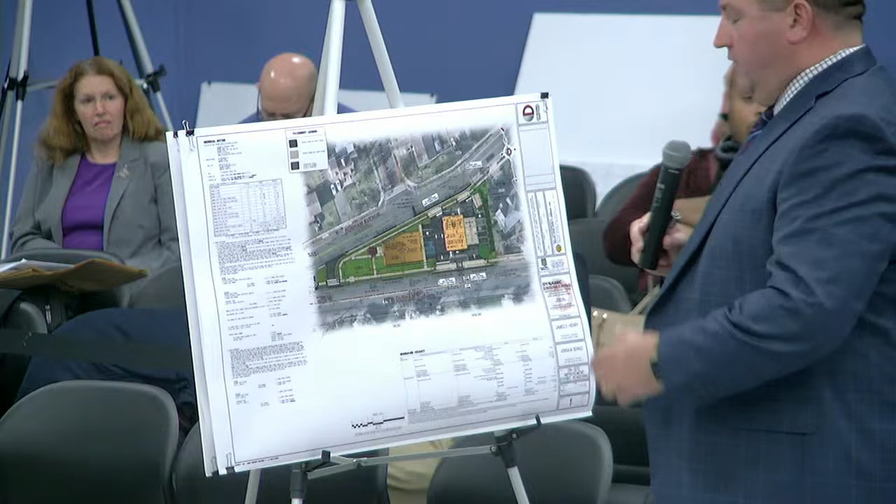So there's a grass area behind the building, obviously this large grass area behind the building, adjacent to the building, and the landscape islands. Also, in certain circumstances on other sites, I know we have trucked snow off as well. If you have a major storm event like we had this past winter - but during regular storm events, there's plenty of room around the perimeter of the site in the landscaping areas to store the snow. If you have something extreme where you have a foot or 2 of snow, you might have a circumstance where we might have to truck off snow. But during regular storm events, things we've seen for the last 10 years - this year was particularly bad for snow - in those circumstances, we have tenants that basically truck off the snow off-site because there's not areas to do it. Thank you. Thank you.

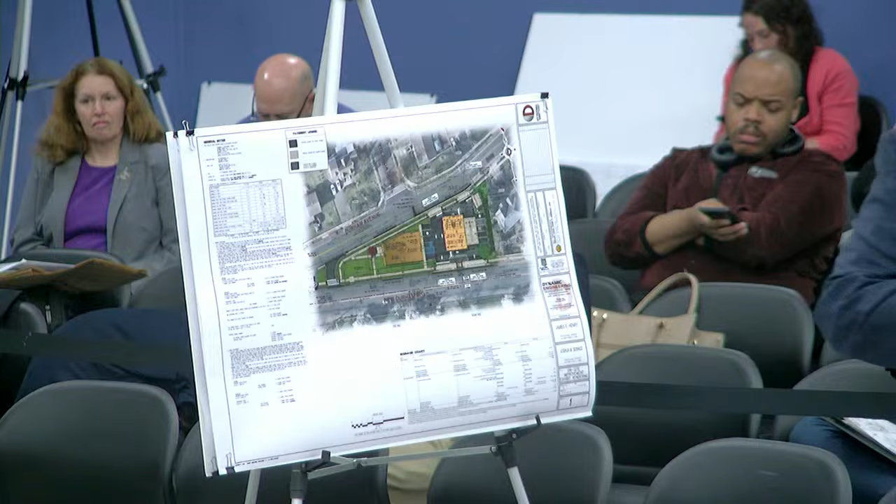So just for the record, you have received a letter dated today from Fire Chief Andy Toth, saying that your proposed site plan is suitable and meets the requirements related to New Jersey Uniform Fire Code regulations, fire apparatus turning radius. And then also a letter...

From the Township of Edison Police Department, Sergeant Winters: the proposed plan does not directly affect traffic flow and meets ADA parking requirements. Any markings or signage should be in compliance with the Manual on Uniform Traffic Control Devices. No further devices needed. You're good with that? Yes, and that's dated April 10, 2026.

Any other questions for Mr. Henry? Oh, Mr. Carley.

Revisit the matter of noise. We did ask for an EIS and, subsuming that, a noise study relative to the equipment, Mr. Henry, because of its location on the site and the lack of shielding. When the board was talking about moving the building, I think intuitively they were talking about the building itself being a buffer to the residences, lending some acoustic shielding. But it would present other problems because the mass of the building would be on the residents, and there'd be a blind alley behind it.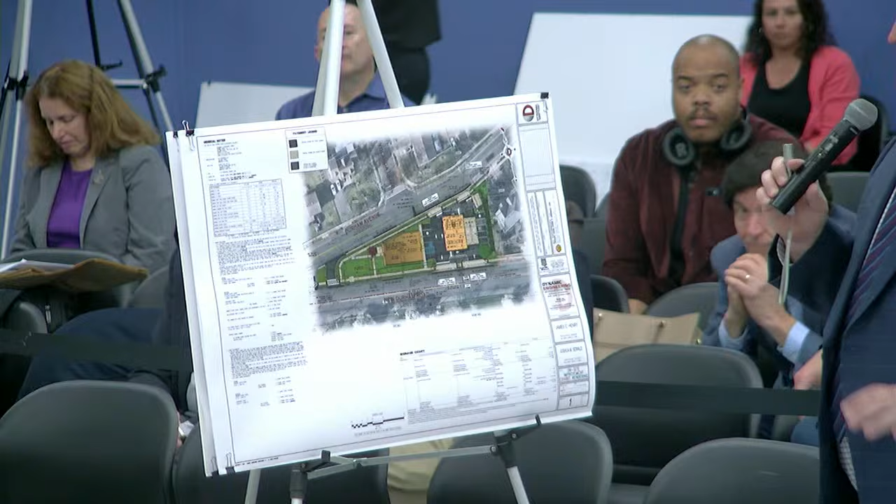We're agreeable to removing them. So I spoke to my client about that, if there was concern prior to this, and he's agreeable to removing them.

One other thing worth pointing out: the state code mainly applies to mechanicals and everything else. So the HVAC we're proposing is on the westerly side of the building facing west. If the building were moved to the east side, the HVAC units would be immediately adjacent to the residential, and that's really where you get into the state noise code. So one of the reasons we moved the building all the way to the west was to keep all the activity and noise to the westerly boundary of the property and not create any issues.

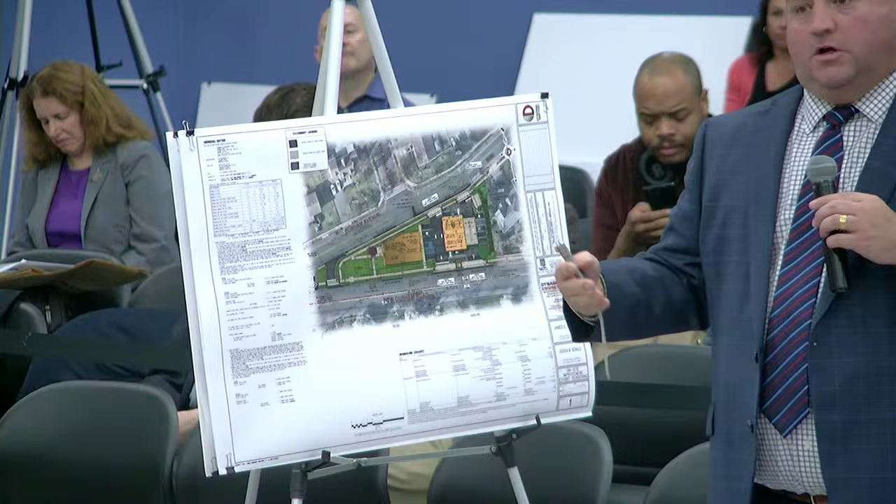I've worked on convenience stores before at different locations, different towns, like Westfield for instance, where there was an alley behind and concern over people going back there, hidden from view, where you're not able to see what they're doing. Whereas in this circumstance, you're able to see all four sides of the building. There's no hiding, there's security cameras. All the activity is pushed to the west, away from the residential.

Jim, Nick can speak to this from the curb cuts, but as Mr. Carley indicated, if you flipped it and put the building on the other side with the gas in front, the driveways would then move closer to the intersection. Yes, they would, and that's not something the county would prefer. No, the county wants to move them as far away.

So you can see on exhibit A2, there's a dark area where we're removing the two driveways that are closer to the intersection, and we're shifting them roughly 50 feet to the east, away from the intersection. So it's an improvement from a safety perspective. I'll let our traffic engineer get into it, but one of the big things in working with the board engineer as well as the county engineer was a lot of discussion about the activity and the driveway locations.

We went back and forth with them 2 or 3 times regarding the orientation, the signage, making sure there were no trucks allowed, and then also the intersection, which our traffic engineer will go over as far as the orientation. There was a lot of concern regarding the intersection of Durham Avenue and New Durham Road, which I think we've addressed. We've worked with the county and gone back and forth with them a number of times, and also regarding our driveway locations, which I think is the safest kind of driveway design we can come up with for this layout.

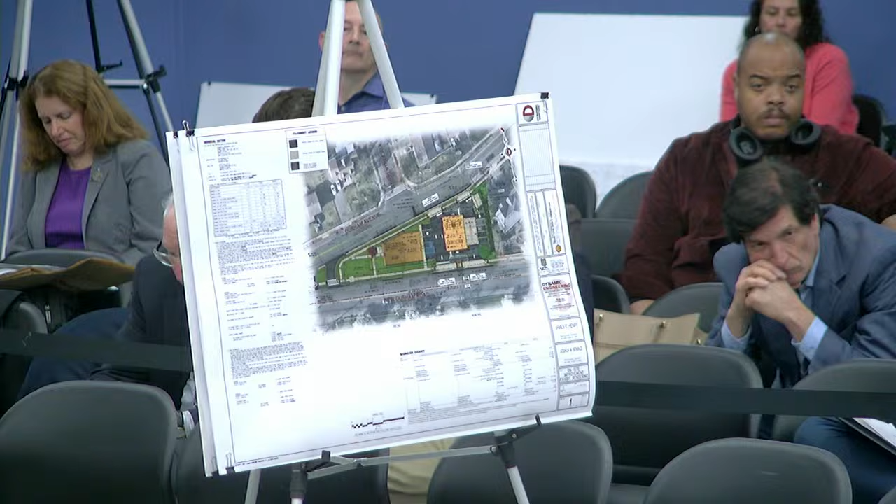I get it, but if flipping the building and gas stations, you may not need all 3, you may just need 2 probably at that point, much wider, but they would come in between for the gas station and the convenience store, would still be away from the corner. I personally think we've reduced it as much as possible, and the orientation we have is the safest to allow for safe vehicle traffic around the canopy as well as the convenience store. Our traffic engineer will be here to testify to that, but as far as site plan layout, having the different accesses and given the circulation around the canopy, I think having those three are as low as we can go.

My biggest concern is that we are adding another gas station, the convenience store, non-conforming. That's my biggest concern. You have a 4-foot setback on both roads. That's my biggest concern, unless you want to slim the building and keep it there. 4 foot on both sides, adding another convenience store on this property is a non-conforming use, and you are adding a non-conforming building.

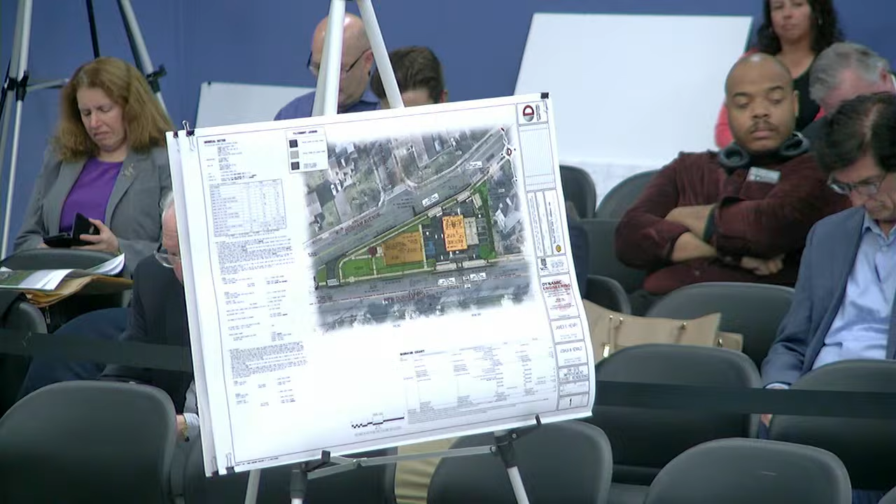All the industry standards are 24 foot wide aisles, standard parking stall sizes. We're not looking for any variances on any of the design elements of the circulation system on the property. So if customers are parked and fueling, or customers are simultaneously parked in a parking space, everyone can flow throughout the site in an appropriate manner? Correct. And the nice thing about having the multiple driveways, you don't have a lot of people that need to cross east and west on the property — most of them are driving north and south.

All right, and all of the parking spaces comply with industry standards? Correct. As well as the ADA stall? Yes. Okay, can you speak to the driveways on site as it relates to sight distance? Yeah, so the sight lines are good in this area. The roadway's straight across this property frontage. If you go to the west, that's where you start to see a curve in the roadway. I'll talk about that a little more when I discuss the intersection improvements and some of the limited sight lines that currently exist.

Does tightening up the driveways or making them a little narrower provide a benefit? It does, it'll help reduce conflicts. When you have wide open driveways without a striped center line, people have a tendency not to follow it and you get people wandering in the driveway. So we've well defined it with stop bars, striping, concrete aprons, and asphalt drive aisles, making it easy for people to get on and off the property.

Okay, do you want to now speak to trip generation? I can, I'll get into that. There were a couple other questions from the board I want to hit on first, but sure, go ahead while I do my study.

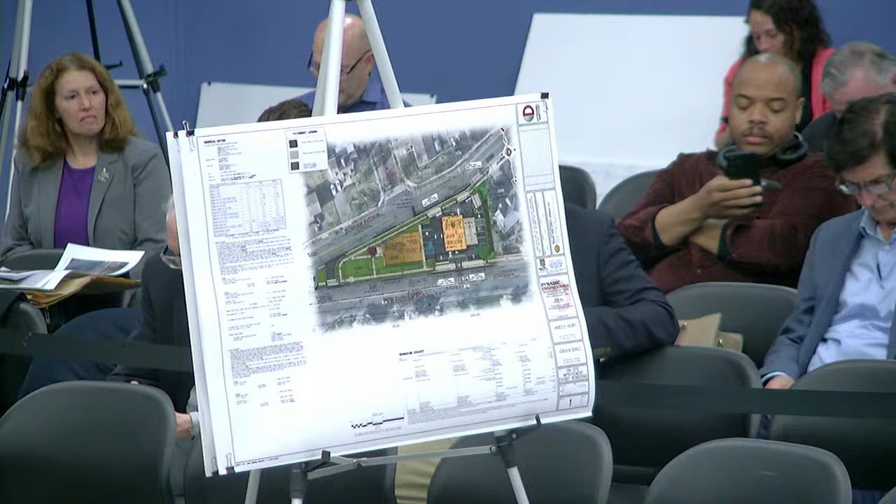This type of use has its highest activity when the roadway is active, because it's drawing 50 to 60% of the people off of the roadway. As you move out of the peak hour, with fewer people passing by, you don't have as many people using a gas station or convenience store. So this site is well situated, just east of the 287 ramps. It picks up people as they're looking to get onto or off 287, and if they live east of the property, they can utilize the site in the morning for gas or convenience items.

So we did those traffic counts to identify existing conditions. The counts were done at the existing site, at the intersection of Yolanda and Durham Avenue, as well as the New Durham and Durham Avenue intersection. We also pulled crash data.

So I went through the crash data for about a 4-year period, just at the intersections, not other ones outside the influence of New Durham and Durham. There were about 50 crashes in that 4-year period. A good amount of them, more than half, were rear-end crashes on Durham Avenue, because that intersection operates at an overcapacity condition. People are waiting for a rather long period of time, get a little frustrated, maybe a little more aggressive, and you have rear-end crashes there.

The other crashes at the intersection include a few side swipes, and a number of right-angle crashes where someone's turning right or left out of Durham Avenue, or turning left into it.

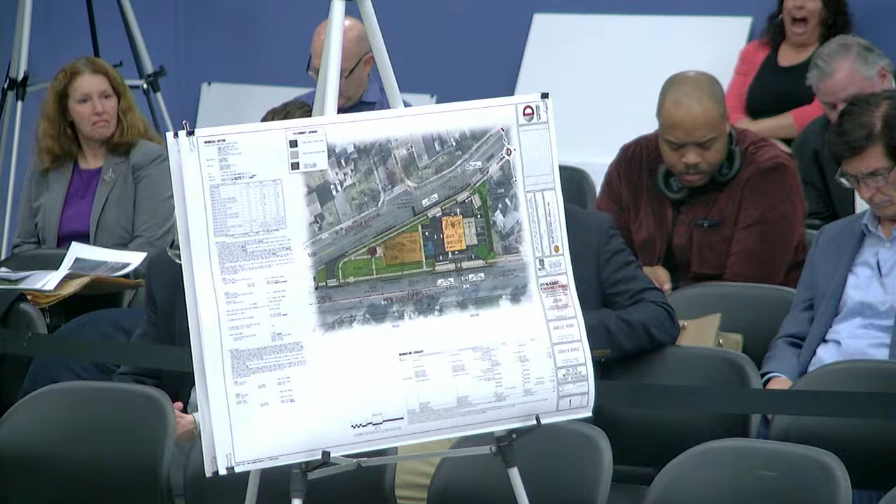Can you just point where that is? Oh yeah, we'll go to that other exhibit. Has that been entered? Yeah, the bottom one, yes. If you could just bring the microphone with you. I got him. I'll use the pointer, I prefer. And you're relying on Exhibit A3, correct? Yes.

Okay, so again, the crashes we mostly saw were rear-end crashes on Durham. If you're traveling south on Durham, with New Durham Road running east-west at that intersection, you had some right-angle crashes, either someone making a right or left out of Durham Avenue crashing with someone along New Durham making a left turn in. You had a couple side swipes of people waiting to make a left while someone bypassed them. There was maybe one weird crash, where someone hit a curb or whatever. So those are the outliers.

But for the ones that relate to the intersection, rear-end crashes aren't as severe. You generally don't end up with casualties or major injuries on the rear ends. It's the right-angle crashes that seem to have the primary casualty rate, or the higher incident rate.

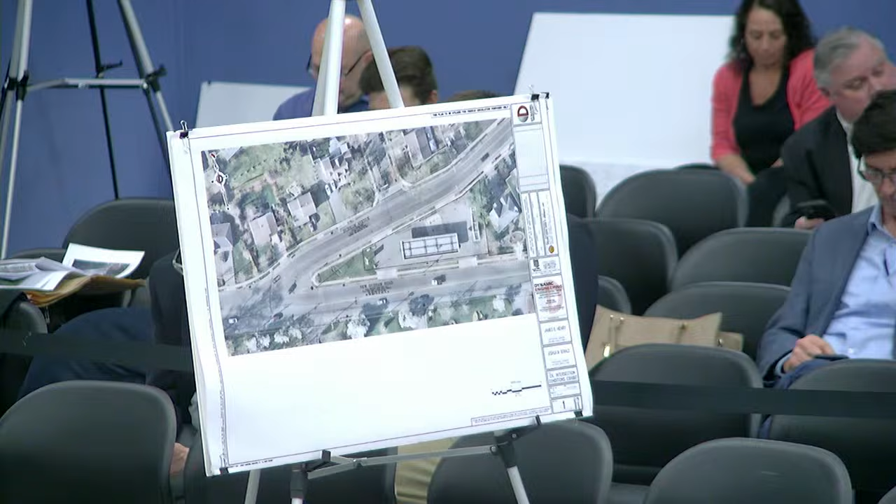Here's the existing intersection, you can see on A3. The Durham Avenue approach comes in at a significant acute angle, maybe 30 to 35 degrees. We love to have intersections at 90 degrees, it provides for the best and safest geometry. This intersection's been here a long time, and that's how it's operated for all these years.

When we started working on this job, one of the first things we looked at, and we started conversations with the county as well as the township engineer, was what can we do here to try to do 2 things: one is help the operation of the intersection, get people through it a little quicker, and maybe more importantly, improve the safety of the intersection and bring down crashes. So what we came up with...

And Nick, just to describe it again, the angle of the intersection, what safety issues does that present? Yeah, so the main safety issue is your sight line. When you come to an intersection at a significant angle, if I'm at an angle to the dais now, and I want to see the dais, I have to look well over my shoulder to see what's going on. If I'm at 90 degrees to the intersection, I only have to look 90 degrees, where otherwise I have to look over my shoulder.

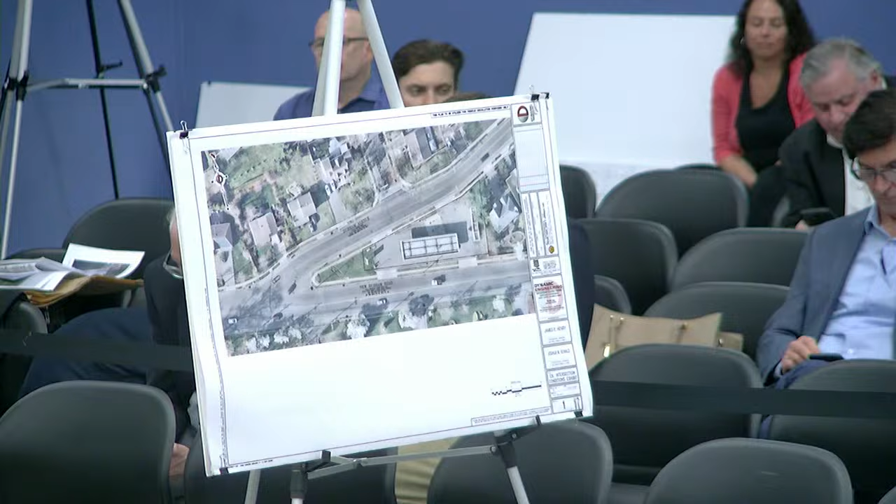If you're exiting Durham Avenue and look back to the left on New Durham Road, you have to look well over your shoulder. Also, while contending with that, and you can't see it on the exhibit, the roadway curves back up to the north, so there's limited sight line in that direction. You're confronted with issues in both directions at the intersection. We can't fix the curve in the road, but we're trying to improve the angle of the intersection as well as moving the vehicle further from the curve of the road.

So now I'm on A4. And these are the improvements that you've been working on with the county and with the township engineer? Yes, I think we've done 10 different iterations of this and had 5 meetings, and this is the latest plan we have that seems to have gotten the buy-in from the township engineer as well as the county's traffic engineer. So just to orient everyone, this is oriented the same as all the previous exhibits. New Durham Road runs east-west on the bottom, and Durham Avenue comes in from the top.

And just for the stenographer, this is A4, right? A4. So I'm going to start way to the right. There's a gray area you see on the right of the plan. Currently there's grass there. What we're able to do is for anyone traveling west on New Durham Road that wants to make a right turn onto Durham Avenue, in the existing condition they come up to the much narrower area as far as the radius, and have to make a longer turn to get back to the east.

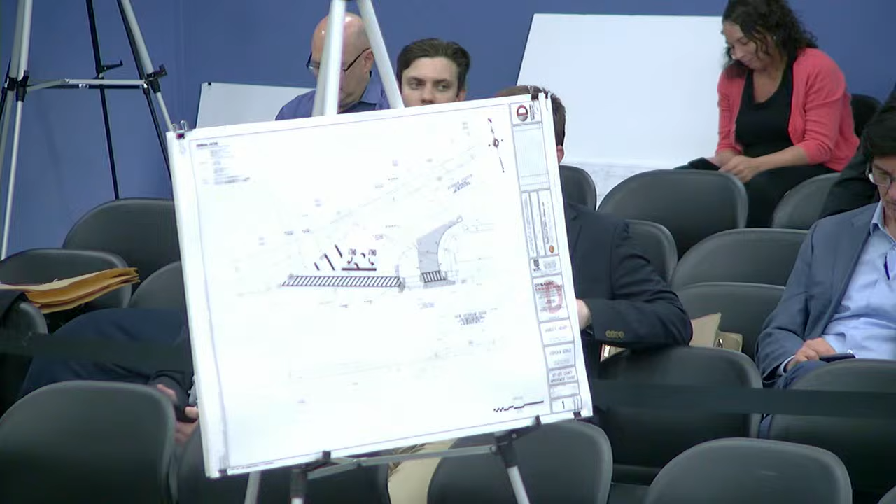Also, what that was able to let us do is move all of the egress vehicles — the Durham Avenue vehicles that want to turn onto New Durham — we're providing a striped area up near the curb line, where before the vehicles traversed all the way up against the curb and the center line was here, pretty much where our right turn lane is now proposed. So what we were able to do is move those turning movements into the center of that 100-foot area and provide a small left turn lane for those handful of vehicles that make a left, because if there's one person making a left in front of you, you're stuck behind them if they don't scoot themselves out far enough into the intersection.

So what we were able to do is separate the lefts and the rights. That alone improves operation of the intersection. And then the geometry, because now we're bringing vehicles in at more of a 90-degree angle at the intersection, it'll improve their sight line looking in both directions because you'll be teed up to the intersection. It'll be a significant benefit. It's a lot of paint. We're going to put a crosswalk in as well for pedestrians through here.

We feel it's going to provide a significant benefit to the intersection, and it comes along with the project. So while there may be some additional activity from the project, even with that, with this improvement we've significantly reduced the delays. I talked about the delay before in the morning being 6 minutes — we cut 100 seconds, so almost 2 minutes off of that, a third of the delay off that movement coming out of Durham Avenue. In the evening peak hour we cut that by two thirds. The delay was almost 200 seconds, and we'd be down to 60 seconds per vehicle. So again, a significant improvement.

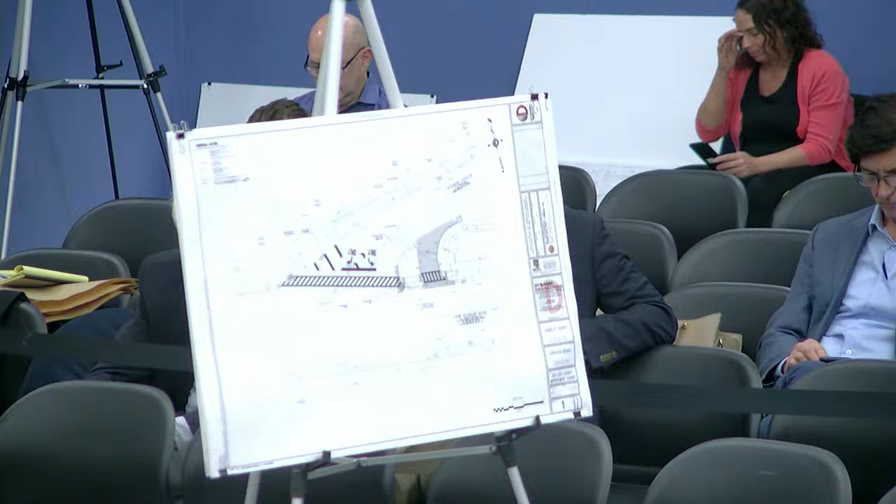So the ramps have been designed in conjunction with county standards for ADA improvements? Yes. So overall, from a traffic perspective, both on-site and off-site, you believe the project provides significant benefits to the surrounding area? Absolutely.

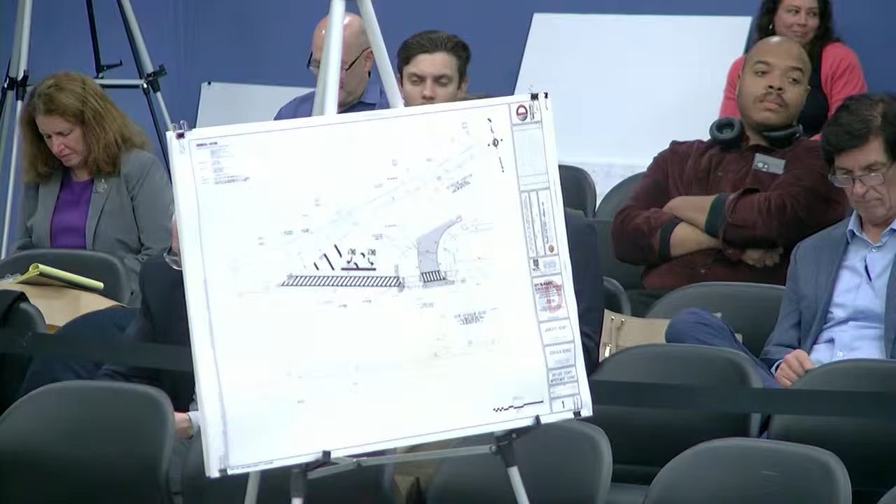But you said not a significant delay. It'll improve traffic congestion to run. The delay would improve because we've separated the lefts and the rights. You would wait much less time than you would today. So the concern you have, we're actually improving it and making it better. Improving, yes. Okay, all right.

Okay, this is probably for Jason, I think. Uh-oh. No, you're fine.

So right now, if you're traveling west on New Durham Road, as proposed, there's that little curve to turn into Durham Avenue. That's on the applicant's property, correct? No, there's a big section of right-of-way there. Okay, so it's in the right-of-way, that was my question. Yeah, so the county has approved us making those improvements at our expense. In their right of way, to make this improvement.

Okay, and that part of that triangle is still the right-of-way that goes west of that turn, correct? You mean to the island? Yes, and you're going to put greenery there, grass or shrubs, between the two directions? Yes, that'll be a green island. Okay, it's right of way, but your client will take care of that, correct? Yeah, it would be part of our county approval, we'd have to bond for it, et cetera. All right, thank you.

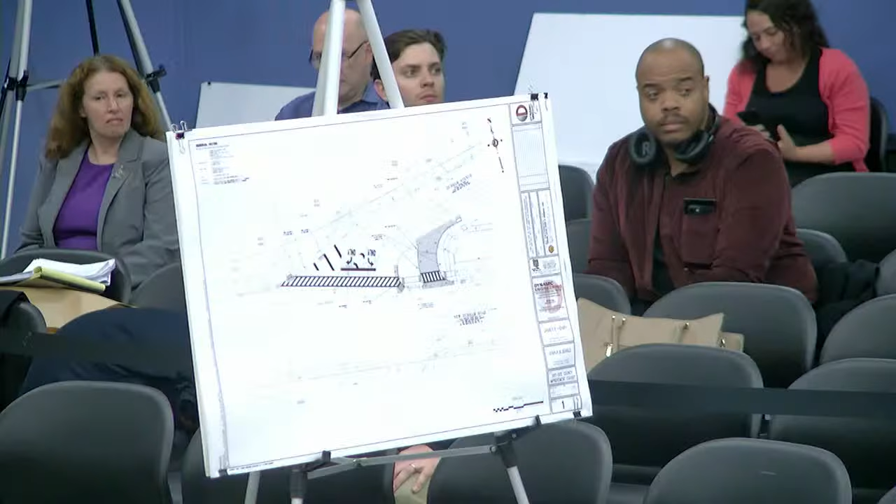I'd still like to see a couple of those parking spaces if they were needed by the employees. I'd be comfortable that the 5 along the front and the parking under the canopy is going to handle the customers for the store. But I guess we could do, like the planner mentioned before, a land bank. That could be something the board could consider that could potentially increase the buffer in that area.

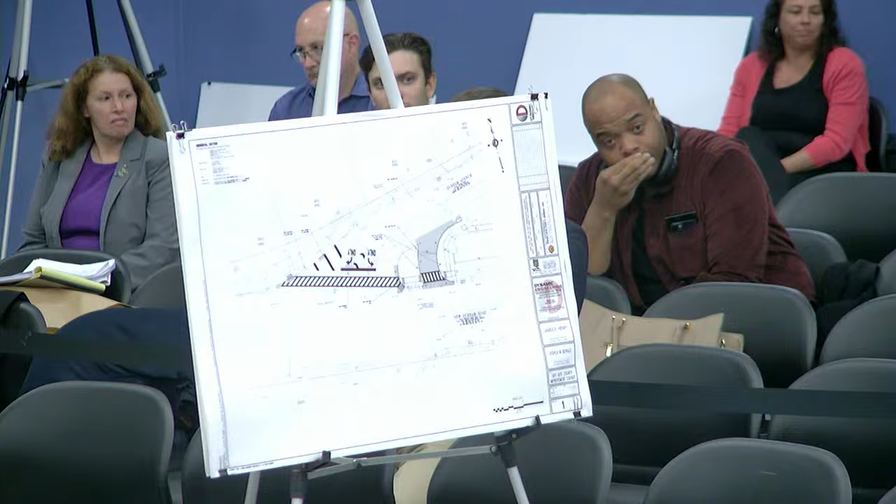Yeah, to the point made earlier about the east side of the property, if the board felt we shouldn't build a couple of those spaces and put more landscaping, we could do that. And then if they felt in the future we needed them, you could always have it ready to build if necessary. Yeah, that's a discussion you'll want to have with the board, particularly Mr. Ayotte, because he'd be the enforcing agent subsequent to a resolution.

And that's about it relative to on-site circulation, Mr. Chairman. It's very straightforward. Everything goes in a circular manner, aligned to the building, parallel and perpendicular. I believe Dynamic has done what Mr. Verderisi says he's done. They've gotten those driveways as far away from that key intersection as they can, and they have committed to an investment in the intersection.

I was taking a bio break, Mr. Verderisi, when Mr. Tuvell was talking about the process with the county. I'm sure you did a warrant analysis with the county relative to a signal. Is that correct? Yeah, I talked about that a little when you weren't here. That we wouldn't meet a warrant because the small volume of left turns out of the side street.

And what a warrant analysis is, and I'll rely on you to correct me when I'm wrong - a warrant analysis is what warrants a traffic signal, whether there's fatalities at an intersection, relative to volumes of flow in the intersection, the various legs of the intersection. And I believe there's 5 or 6, Mr. Verderisi? If you add in, there's more because there's A's and B's to some. So yeah, there's more than that. This doesn't meet any of those criteria? No. Okay, thank you.